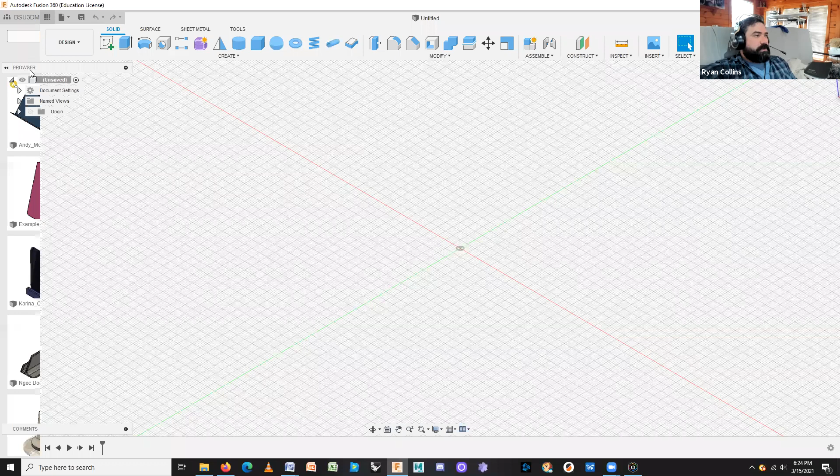Alright, so let's get started with this. I imported a model that I made before, let me open this up. I started a new folder for Lofted Vessels.

Basically, what a loft is for—whereas for the rotate vessel we used the revolve tool—let me change the appearance here so you can see it more clearly. There we are. The revolve tool works excellent for fully rounded objects, something more like a thrown cup or something like that, so it's cylindrical.

Loft is excellent for making still somewhat rounded, kind of organic forms, but over more unique profiles. That term is going to be very important in this assignment and just in using lofts. A profile is a cross section at any point in an object.

Whereas before I showed you how to use, and I'll demonstrate here again, under Inspect, the section analysis tool, which we did right at the center plane, showing you splitting the object in half, basically how a revolve tool would work.

Well, this works instead—let me select my face here. Instead, oops, wrong one, I wanted the plane. This is going to be taking cross sections vertically, and the loft tool will actually generate a full form around a couple of, or however many you denote, major sketch profiles.

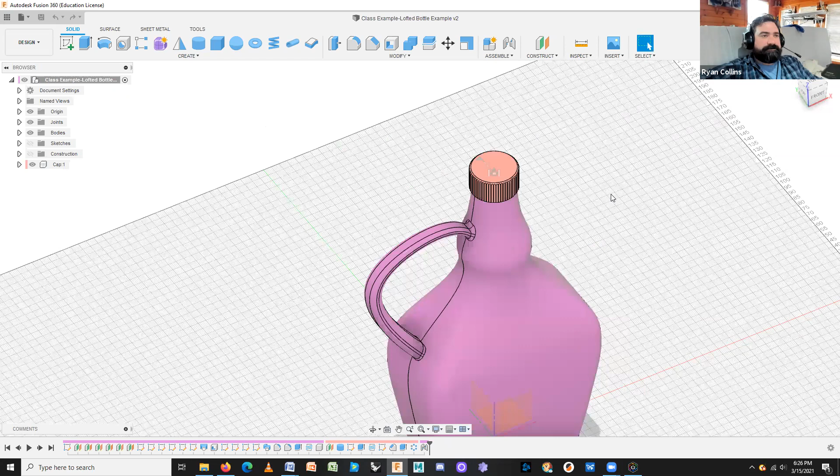I'll be showing you different ways of making handles, connecting them, as well as, as you see on the bottle cap here, I'll hide the cap, there are threads on this bottle. This is also hollow. This is not a solid form. So far, we've been making hollow or solid forms by extruding sketches and such down through the body.

With this, we'll be actually using the shell tool as well, which creates a hollow space inside of a different body. It doesn't have to be rectangular or angular like we've been doing with extrude. It can create that through really any method. Really neat tools.

And then finally, unhide the cap. I'll also be showing you, if I grab this cap, I can drag it, and you see it is both moving upwards and it is rotating. Now, we'll define how to use these joint tools later, and it's not actually interlocking right now. I clearly have to redo that. And as I changed that, my position icon came back up. I don't want to capture that position. I want to revert back to what it was before.

So that's the stuff we're going to be covering. That's going to be a lot, but once we start discussing it, honestly, it surprisingly simplifies. Because like any of these we've been working with so far, you get a complex form. It's just a series of simple functions, all pushed together. So let's get started.

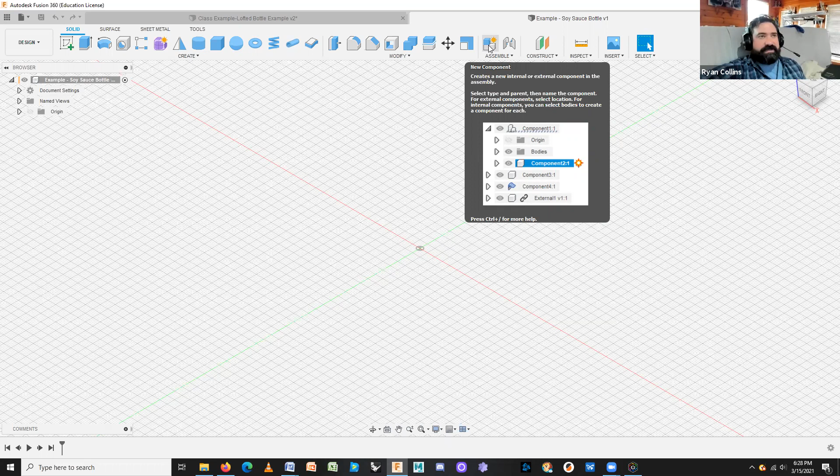So I'm going to start immediately by creating a couple of new components. You could always do this later. I like to start it now, just so I have them defined, so I try not to confuse myself later on. It's still going to happen, but whatever.

So I'll do one as bottle. I forgot to uncheck the activate component button. So remember to go back up and activate the entire tree. New component. And this is what I was talking about. Uncheck that activate checkbox. And with that, I'll just title that as cap. So great. Now I have those already established. So I'm going to activate the bottle component.

Now what we're going to do, I'm going to start with one single sketch. And looking at my soy sauce bottle, I'm going to get a general sense.

Now, again, the soy sauce bottle is not an ideal bottle, but I don't know what I did with my syrup bottle that I usually use as an example. We probably just finished it and I forgot. Which means, oh no, I don't have any syrup in the house.

All right, so I'm going to start with just getting a couple of general dimensions. I realize you can't see my ruler here. I'm not measuring the upper bottle, the entire cylinder. I want this lower part because this curves downward. So that looks like about 45 millimeters. So I'm going to start a sketch. I'm working on the flat bottom plane here using a center diameter circle, right in the center. Go out, 45 millimeters. Great.

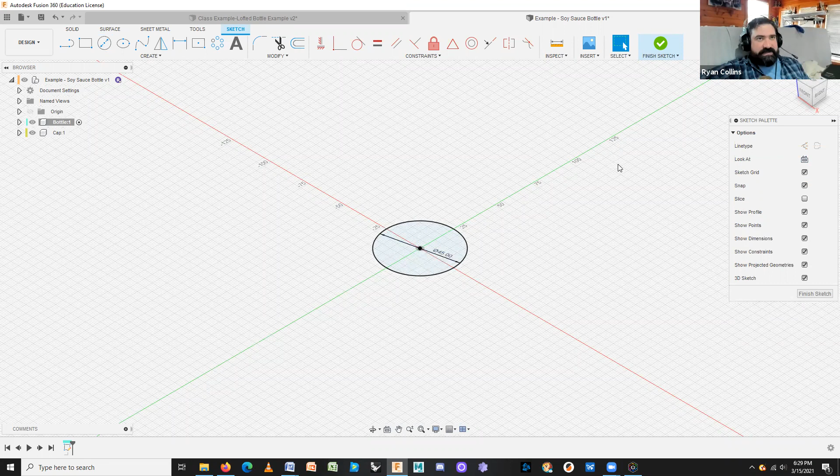Now this is where this process starts to get a little bit tedious. You would want to say, all right, I'll keep doing the sketches and go up from there. That's not how this tool works. I'm going to finish this sketch. Now what I'm going to do is create other sketches further up and away from my starting point, which is the base.

And to do that, technically you could drag sketches upwards, but that gets really problematic, because if you make any changes, then you run into the... word fell out of my head. I'm sorry. You run into world coordinate problems.

Just like before, when some of you had experienced, you dragged an object to somewhere, selected capture new position, and it snapped back to where it was before. Those are the problems. However, if you build a construction plane for each one, it gets around that problem, and then you can also make alterations as you like.

So to build a construction plane, look up at your main toolbar. I've already finished that first sketch. It's the default first button on construct. Click that, and first it's going to ask you where you want to start, from what plane is your reference. I'm going to start there.

Now I can either enter it numerically, a distance, or drag it upward. What I'm going to do is measure up from that first cylinder, or that first circle, up to the next major point. So I'm going to measure up to there, and that looks to be about 15, let's say 14 millimeters.

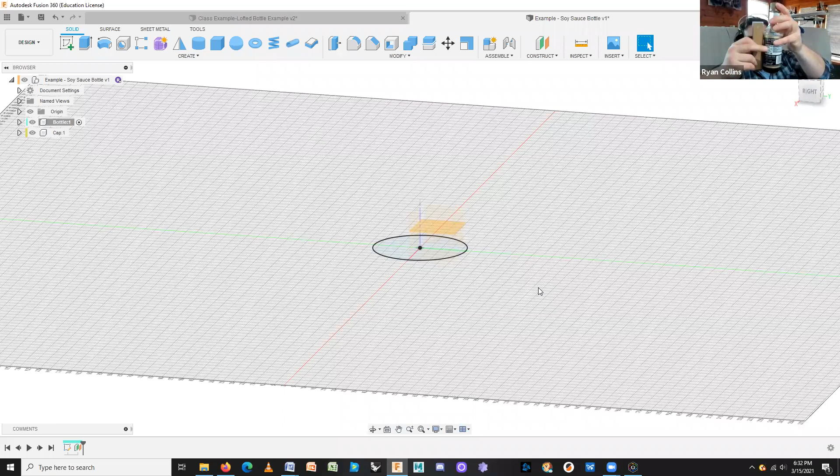You can always measure either from the original flat plane or from your next one, so you keep stacking measurements. Doesn't really matter, it's however you prefer. I'm going to measure up to where this shoulder of the bottle starts, and measuring from the very bottom, that is 115 millimeters.

So I'm going to make another construction plane starting from the original origin, and I could drag it up or just enter numerically, 115. Now I'm going to start to there. Next point is where the bottle comes down to the neck. Measuring to there, that's at about 140.

Again, construction plane - remember, if you right click out to the side, you have your recent tool selection - and I just measure to there from the origin point, 140. Hey, isn't that convenient? Went to right there. Did I say 140 or 145? 140 works.

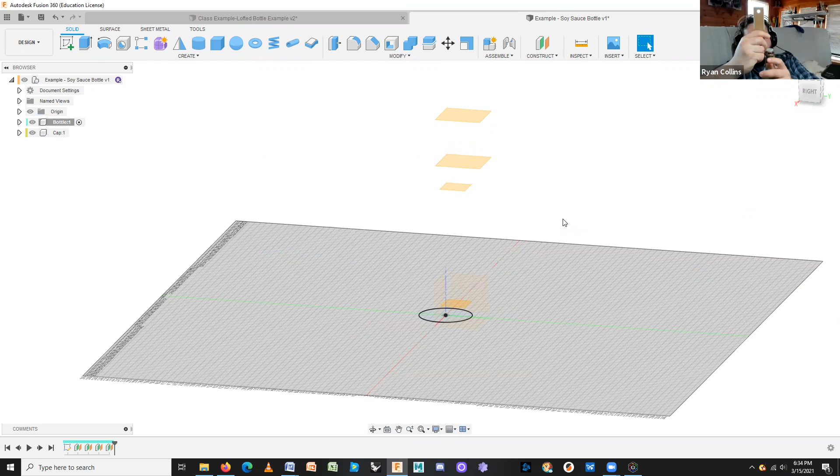These aren't actually anything, these are just reference planes in space, doesn't actually measure or matter. Now the final part is where those threads start, going up to the final tip - that's about another 20. So instead of starting off the original, I could start it from there, go another 20, same diff.

Okay, now I have my major construction planes already in place. From here, I can start to create my major sketch elements, my major profiles. Again, you do not have to make all your construction planes first - you could go point by point or layer by layer. It's up to you, I like to work this way. That way those are already set, and I can make changes as I go. It's totally up to you.

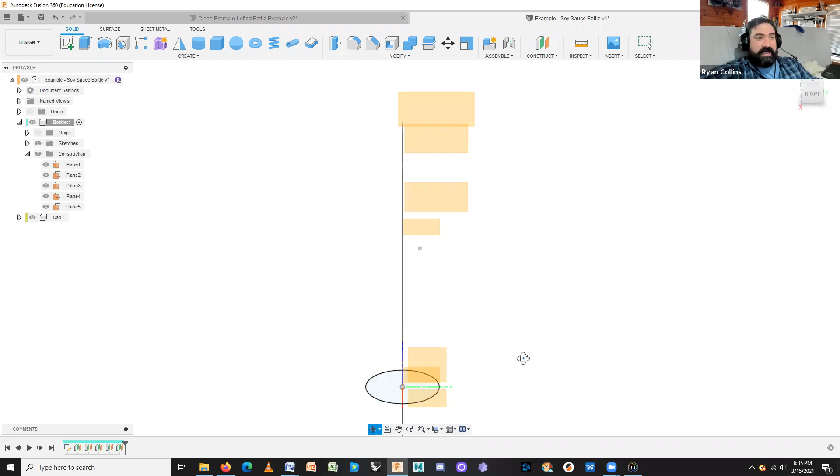I'm still working on this component. New sketch - and if it's hard to see, you can hide the origin. If I expand this component now, you'll see I have these construction plane options, so that way if I need to, I can hide or rename them so I don't get as confused. So I'm going to select that next one up from the bottom.

And that profile of the bottle looks to be about 55 millimeters. Great. So if you look here, if you can see more clearly, I am working above that original sketch. And remember, the plane just gets generated, this grid just gets generated automatically. So I'm still working directly from the center.

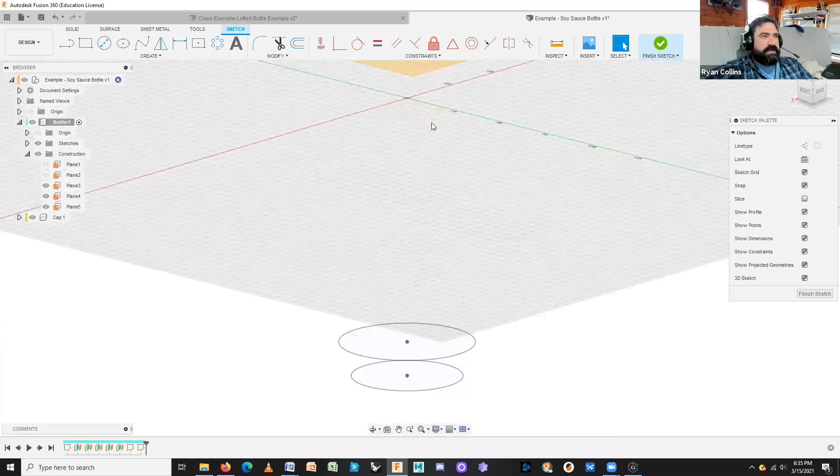That one's 55. Great. And if I look over, you can see that that sketch is slightly larger than the next. Great. Finish sketch. Start a new sketch. Now I'm going to work off of the next plane up. Do the same. Center. This one actually is also 55. So it's basically a cylinder from here to here. Finish sketch.

Start new sketch. Working on the next plane up. Now the bottle shrinks down to about, looks like about 33 millimeters. So I'll start there, working right in the center, 33 millimeters. Finish sketch. Like I said, this part gets kind of tedious. This is a cylinder from there. So same, 33. Another sketch, next plane up, center circle, right in the center, 33. There we are. Finish sketch.

Final one. And I may have mixed myself up here. I may have to add one more.

Final one. That soy sauce smells good.

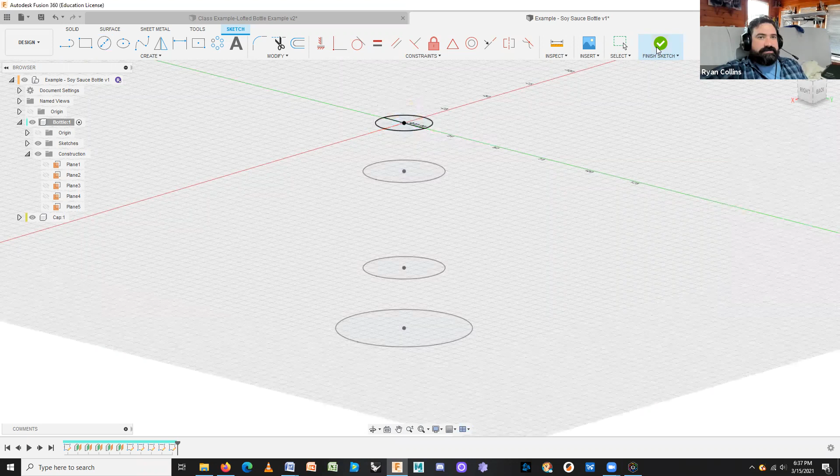That looks to be about 23 millimeters. So we'll start a sketch on that plane. Center circle. 23 millimeters. Not 3, 23. There we are. Finish sketch. Okay. So now you can kind of make out where a bottle profile might begin.

So here's where the Loft tool comes in. Under Create, or if you've added it to your toolbar, that's fine. Go down, Loft. And as you see in the example here, it creates a transition shape between two or more sketch profiles or planar faces. There's different ways of doing it. But you see the example here, it's going from a rectangle or square to a circle, and it automatically generates between those surfaces. So I'm going to select Loft.

Now, a major thing that's important about lofts, and I'm just going to hide the construction planes. There we are. The order you select your items is very important. You have to start from one end and go to the other. Now, does it matter if you start at the top and work down, or the bottom and work up? Yes and no. If you're just making the loft, it does not matter.

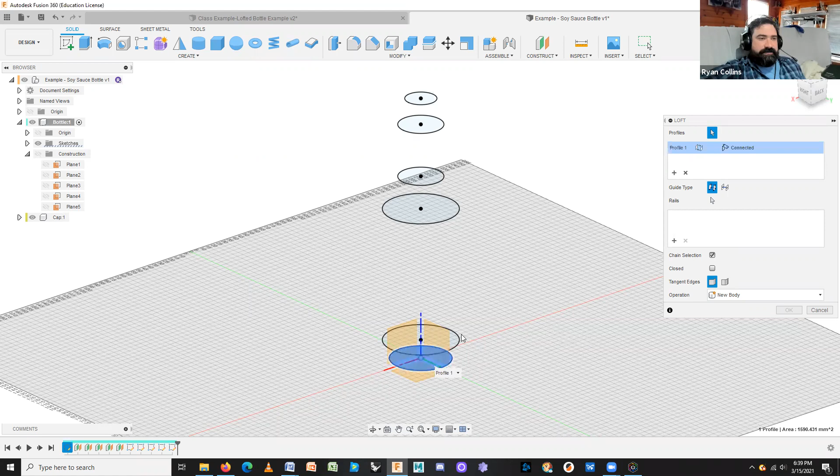However, with the loft, we're eventually going to use the shell tool. The shell tool works best if you're using it on the last surface or sketch profile that you are working with. So I recommend you select your profiles from the bottom and go upward. So I'm going to select the first sketch, second sketch, third, fourth, and you see how it's automatically generating. Fifth and sixth. All right.

So obviously that's problematic. That is not at all what the profile actually looks like. The bottle is much more cylindrical, but it is trying to generate as it sees. Now you have some options here. Guide rails. Right now we're not using rails, so we'll just use the center line, and I'm going to discuss what guide rails are next after I show you how to play with making handles. There's no active center line, so that's fine. I'm just going to use rail then. It's not really a problem.

Yes, these are all connected. That's fine. I have chain selection. It just chains everything. You can click and unclick, see how it looks. Closed makes this a sealed object, or rather unchecking it makes it not. So I want to leave that as closed. The end caps are just the end caps. I don't need to add anything to that.

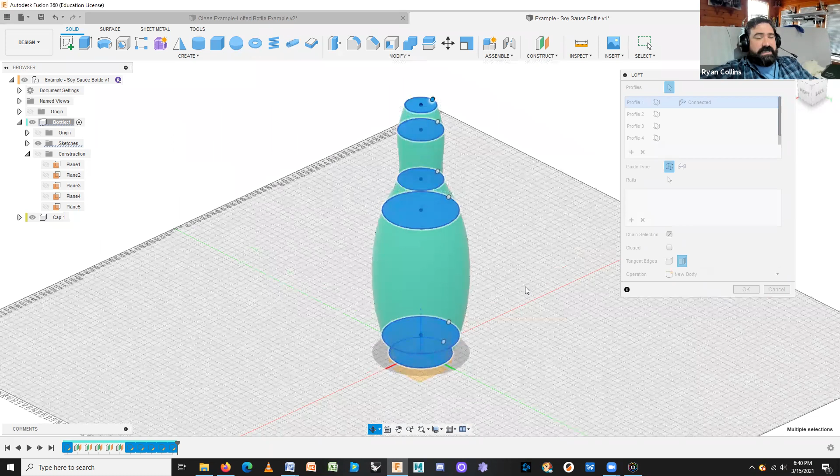You can play with the merge or tangent edges. This, depending on your model, can make big alterations. Because all of my profiles are circles, it doesn't really matter. If I was going between rectangles or squares and circles, it would definitely change. So I'm just going to leave that at merge. All right. So like I said, this doesn't really work correctly.

So I'm going to actually save this as a new component so that I can throw that out later, or I can keep that component separately and play with this again. So, all right, great. That just started a new component. It added it within the component tree. Cool. So you can see how it automatically generates these forms. So I'm going to hide this first one.

Goes and hides all the sketches automatically.

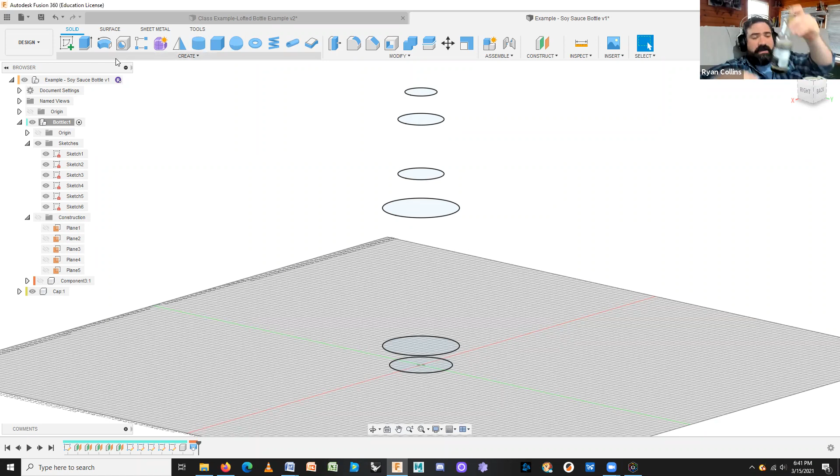So now I'm going to show you a different way of working with that same set of tools. Now this I'll probably have to add additional construction planes, and that's where the labeling can definitely come in handy. But since my bottle is actually much more cylindrical, let's play around with that. I'm going to go to Loft, and I'm just going to work on the top here. So with this one, I'm going to go from the top down.

Oops, I accidentally selected that point, not that. So let's close that one. I didn't want that, just the center. I wanted the actual form there. All right. Basically the same thing. So let's select out of some of these here. Going from direct cylinders to lofts gets kind of problematic.

So what you can do is, and I'll show you the difference here, I'll just create this section here, one new body. Great. Now I'll do another loft, only this time I'm going to use just those two profiles, and it's going to create a direct cylinder. No, I don't want to cut. I'm just going to leave that as a new body as well. So this is how you can get around if you're trying to make direct cylinders or you're trying to clean up a form. This is an easy way of working with that.

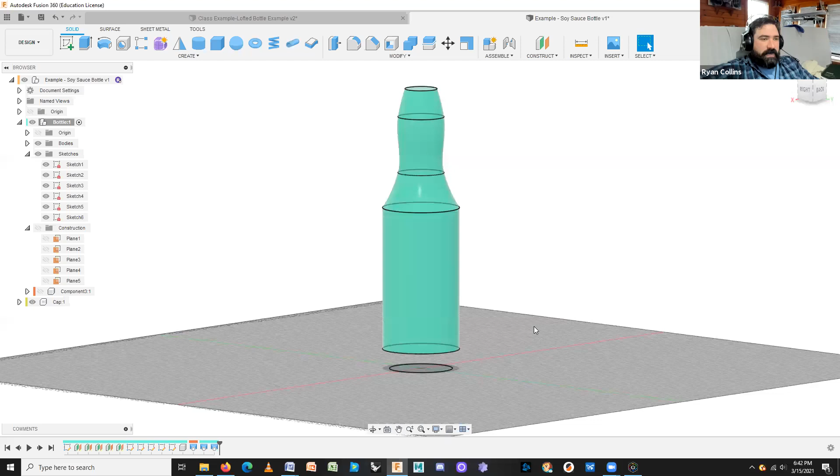Now, the problem is if I did the same down here, well, that's just going to make a cone. So this is where you really need to be able to have additional shapes to play with. So I'm going to make another construction plane, and I'm going to drag this just below that one. So we'll say 12 because it's at 14 millimeters. Okay, great. So there's a construction plane there, and it automatically hid it.

But what you're creating is not visible. Oh, yeah, that's fine. I'll go ahead and unhide all of these. That's problematic. Okay. So now I'm going to create a sketch. And this is where this stuff gets really confusing if you're not careful with hiding planes. Oh my God. Why is that not visible? It should be. Oh, there we are.

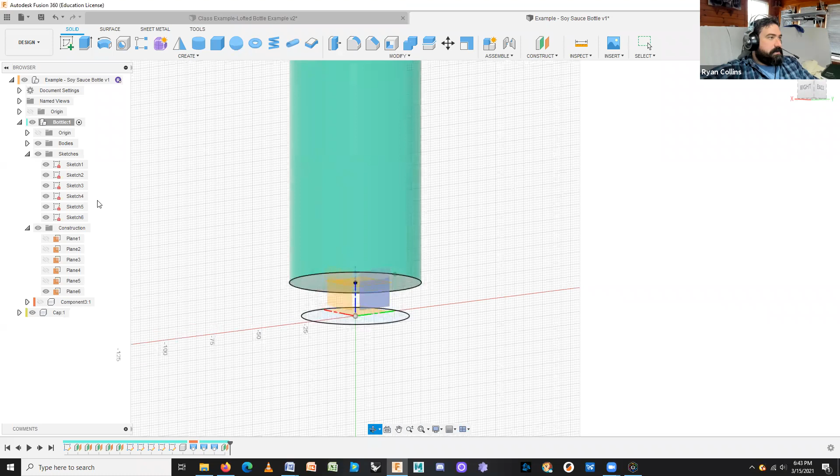So what I actually want is that one construction plane that's floating just below. There we are. God, that's hard to grab sometimes. And again, if you have trouble getting to where you want it to be, or getting your icon where you want it to be, hide bodies and such, that's fine.

There we are. And what I want is I want this circle to be just slightly larger than that first one. So we'll go with, sure, 56. That's about right. And finish sketch. Because I want it to bump out ever so slightly. Great. I'll unhide the bodies, and I'm going to start one more loft.

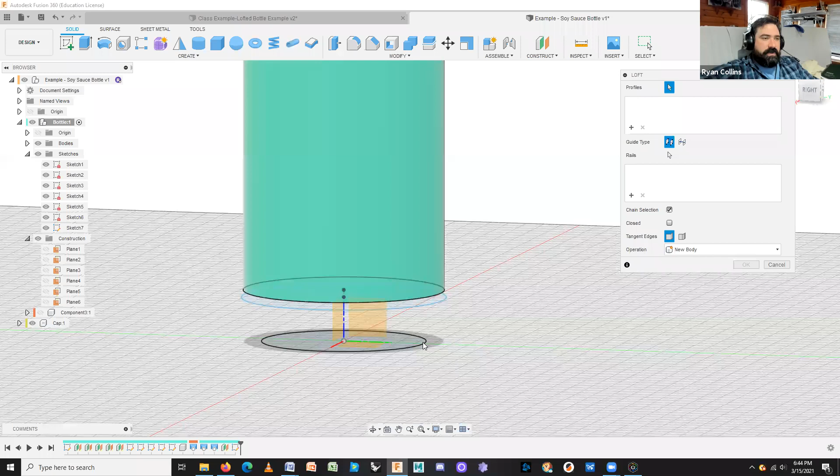So now that I have this additional little bump out, when I start selecting my profiles, I now have that additional one. See, the first, if it were just between two, it's just a straight cone. But now I add that third one, and it rounds out that bottom because it's drawing a curved line.

Effectively, how the Loft tool works, think of it as a fit point spline, like in the sketching. Instead of a straight line, a fit point spline, only it's drawing it all around, or it's drawing an infinite amount of them. It's not infinite, but rather than a line, it creates a surface in the same way. So that's how it works. And now I'm going to leave this as separate bodies for now, but this is how you can create those little bump outs.

So ideally, I would add another circle, another plane just up here, and that would help me create that bump out there. But right now, these bodies are all three separate ones. Now what I could do, I'll hide the sketches. Now I could go and select all three of those, use my combine tool, and join them all together. So that'd be great. But I'm going to leave it separate for now, just so I can work with it.

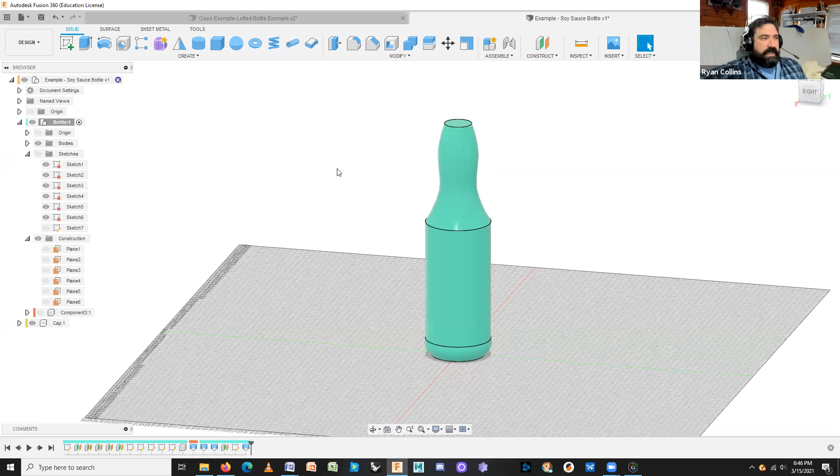Now, another problem is that top there. You get to threads, that sort. Right now, first, I want to work with other ways you can work with a loft to, say, create the handle and such. Or for that matter, how I can create the cap. I can go and select my cap component now. And I know that my cap needs to be larger than that cylinder there because it's larger than the threaded surface will be.

So I guess it will actually make sense to do this separately. All right, so right now, as it's showing, it kind of got messed up.

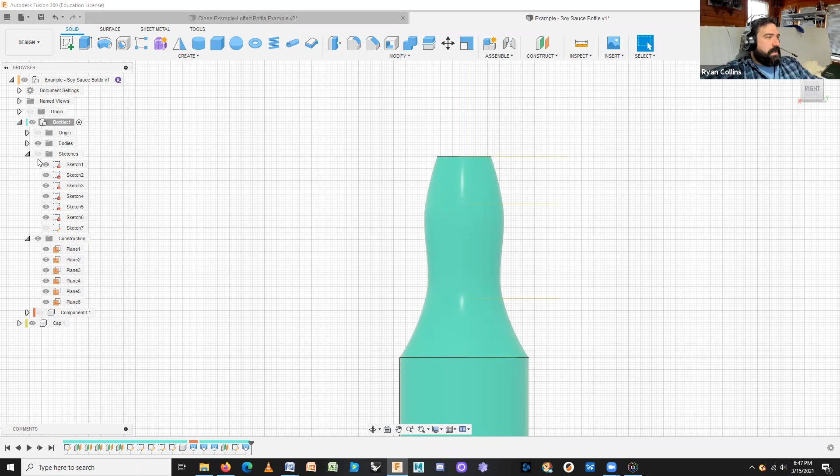Inside of here somewhere. All right, so let me unhide my construction planes, and I'll just hide the body for now. Leave the sketches.

So what I needed actually was one more sketch there to delineate what's going to be the cylinder, direct cylinder for the threaded area. So if anything, or not if anything, it's what I should be doing, I'll make another construction plane. And I can start off with this one and just go up. Looks to be about, we'll just say 3 millimeters. Great.

Okay, and I forget what that circle is. That is 23 millimeters. Perfect. Oh, this gets so confusing in here. Sketch on that new construction plane I just added. Center point circle, and that's supposed to be 23. Great.

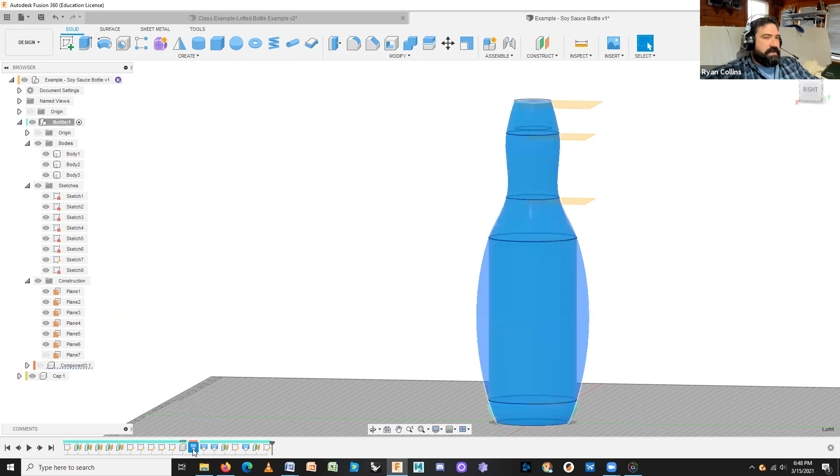Now, when I unhide the body here, it might give me some trouble. No, because it just omits that. So this is why I left these as separate bodies. Because now I'm going to delete this one, or rather, I can go back on that first loft. Not that one, that's a different component. That loft, and let's edit this feature here.

So like I said, it does matter what order you do things. So I'm just going to go back and delete some elements here. And instead, I'm going to start from the bottom.

Did it hide one of my sketches? Oh, cancel that. All right, so this is problematic. I am actually going to have to, instead of editing this loft, because the loft here occurred in the history slider before I added that additional rung. So I'll have to delete that feature. That's fine.

Couldn't you move the plane and the sketch to before that loft in the timeline? Possibly, but just to help with everybody what they're all doing too.

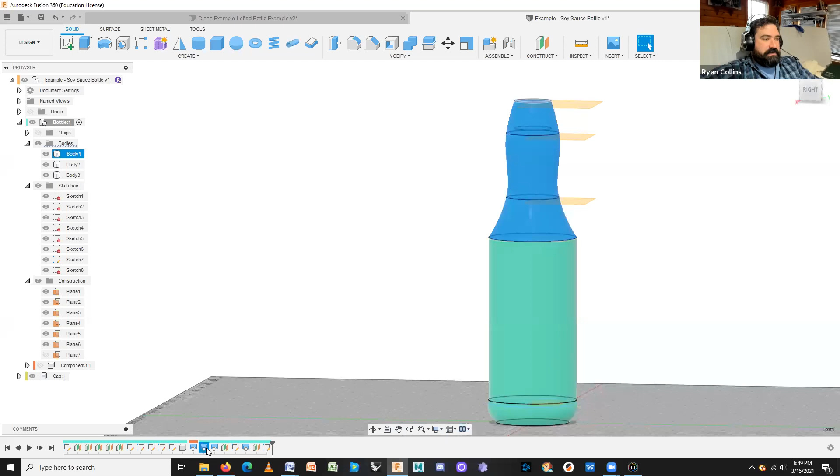Let's see here, I just want to delete the feature. Go away, there we are. Okay, so let's just add a new loft here. Now we're going to work upwards and see if it lets me do it this way, or if it just goes completely nanners on me. Yeah, it's going to go kind of screwy on me.

Okay, that's fine, so I'll have to construct this top here in multiple levels. All right, so this is where, no, I don't want that to, I want that to be a new body. There we are, chain selection. Yeah, it's really throwing it out there. Well, that's irritating.

Yeah. Unfortunately, it's not letting me loosen up my constraints here. All right, well, let's try from the top down. Maybe that'll help.

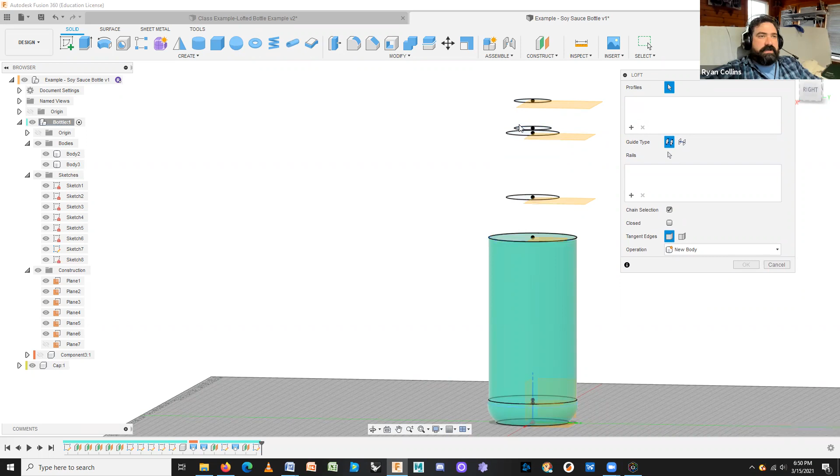There, oops. Didn't delete all the profiles I need to delete. There to there. And it's still not really. Well, we'll mess with it more later.

Okay, because what I wanted was just a straight cylinder here. So the other thing you could do, if you just need a straight cylinder, now is where I could also use an extrude tool and use that top profile and just go up to the next. There we are.

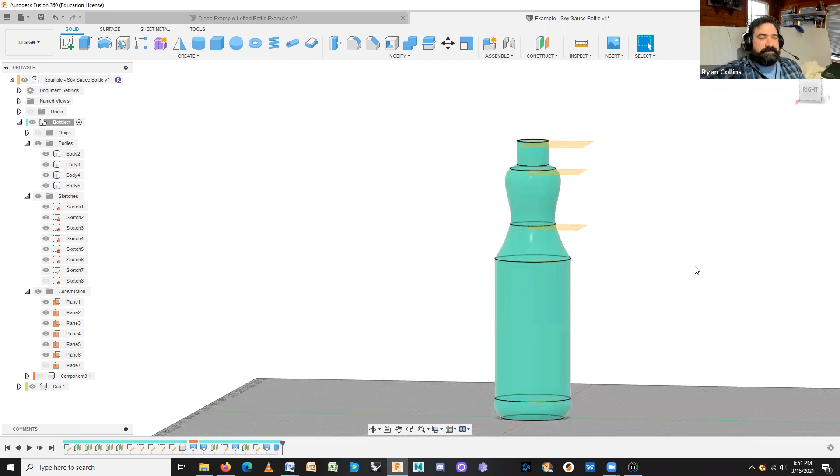And just keep that as new body. Great. So obviously that right there, I'm going to have to tweak the profiles a bit, but just for time's sake, as we're moving along here, let me go ahead and join all these together. So I'll do a from the right selection box, click all the things, combine, and join.

Now I'm going to, again, do a new component just that way I can keep everything separate and I can always go back and alter things. So click OK, it's going to do another new component. Oops, I didn't manage to select all the things. That's problematic, but go back, edit feature.

Just need to make sure I'm getting all of those. Why isn't it letting me? Well, that's strange. Oh, I must just not have actually selected everything at that time. At that time. Interesting.

It keeps omitting stuff. All right, well, I'll have to figure out why it's doing that. I'm not sure why it's doing that right now, but anyway. Well, I can't do the shell unless it combines everything.

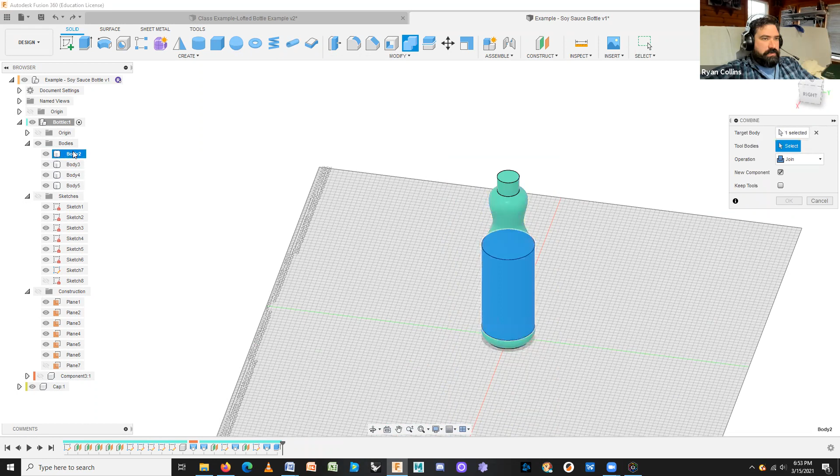That's very strange. For whatever reason, it is not allowing me to select all four. I must have skipped, I must have done something. There's no reason it shouldn't be doing that. Let's try this, maybe it only lets me, maybe it has a 3-item cap. That's definitely not it. There's something up with this bottom one. Does it have something to do with one of them being selected as the target body and the others being selected as tool bodies? It shouldn't matter because during a combine, it's just joining everything.

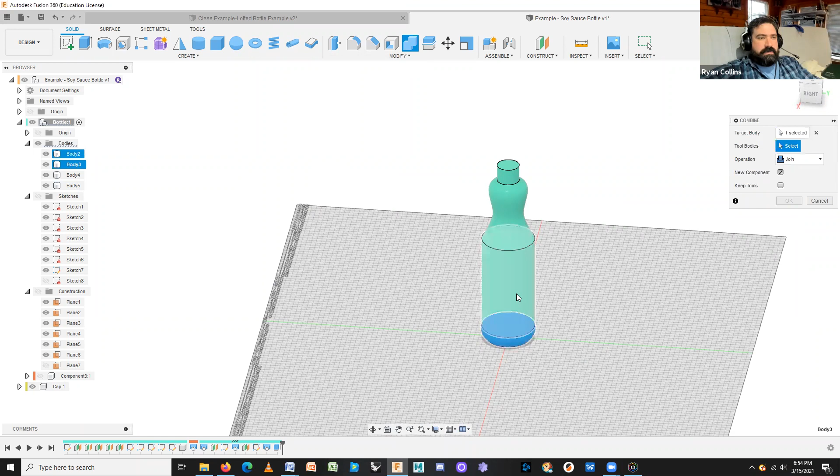It's not that one is necessarily acting on the others, unless that is the case. I guess so, that shouldn't matter. But all right, I guess that's one of the quirks of Fusion then. All right, fair enough, good call. Thank you.

That's always fun. All right, so I do still want to throw it out as a new component just that way I can go back and play with this later. Again, weird, it is omitting that. I have no idea, that's so strange. Is it including it? Is it keeping that one in the original component while having it also be part of the new component? I don't know.

Let me hide those, and I'll go down and activate that. Now it's still showing, but for some reason that one body remains. That is very strange. That was what happened when I had to do on the phone stand when I connected 3 legs. I selected those 3, and then the target was the back, and it all becomes one.

But since you're combining, it's like, oh, this one is combining to these ones, I guess. Right, and it makes a lot more sense when you're joining dissimilar items, but when you're basically stacking things... yeah. Well, once again, it's all Fusion functions on order of operations, very structurally.

So, all right, there we go. We all learned something important. All right, much appreciated, thank you all both. Thank you both for the input.

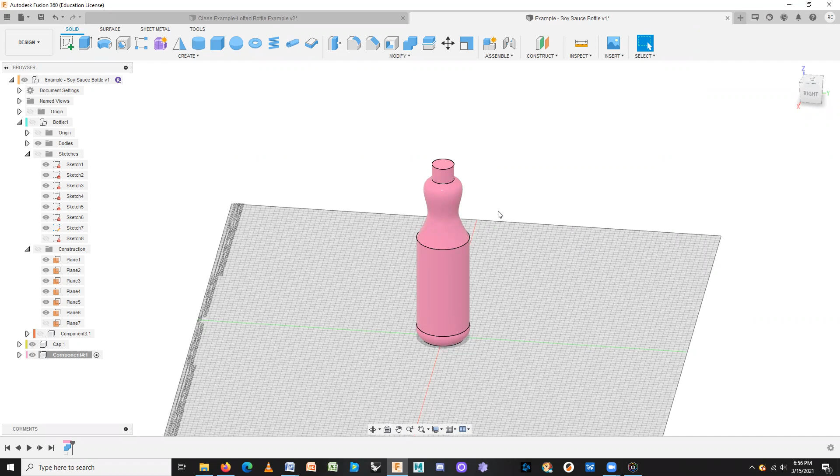Is that making the round shape? No, the round shape is occurring because, let me go back and hide these. The round shape is occurring because I don't have the correct profile sketches here, or I'm not doing it in the right order. This between the top, between the neck, it needs to be a cylinder. I need to add in more elements like I did for the base, and it'll come out the correct way.

But just for time's sake, I wanted to try to speed run through this to get everybody informed on this stuff. Okay, but yeah, that's not a difficult fix. I just want to try to cover as much as we can tonight.

So the next one I wanted to show you is the shell tool, and this will make this now solid body into a hollow body. So select shell, and what it does is it basically creates, it's basically the offset tool, but for a full body rather than just for a sketch line.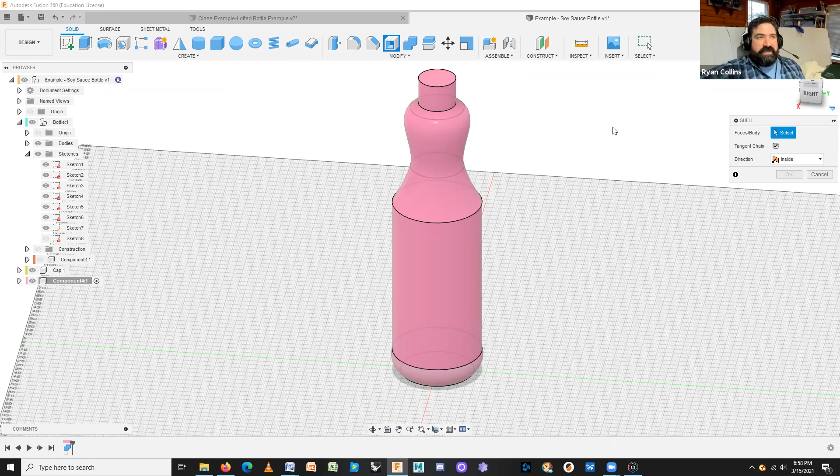And again, this is very important which face you select, because you want to select the face that is going to remain open. It's going to assume it's going through the entire new body here, but I want to select this top body here. Now, I will warn you, more complex shapes will definitely bog down your computer as it tries to compute the offset, so I highly recommend don't use the slider, just do a numeric input. So I'm going to select 3 millimeters, which is usually a good thickness when you're 3D printing.

And there we are. So that actually went pretty quickly. I'll try 2, a little bit thinner. Actually, it might need 3 just for the thickness.

So you have your other options here. Obviously, you can create a shell on the inside or outside. But just inside is what we want. Now let me change my visual settings to show hidden edges. You can see I can look down inside that bottle now.

That is now a hollow form. Very cool. So now what I want to do, I was going to create the cap first, but I want to just go ahead and continue with this bottle. Now we're going to create the threads. And this is another tool that really works pretty easily in Fusion. Go to create, down to the next set is thread.

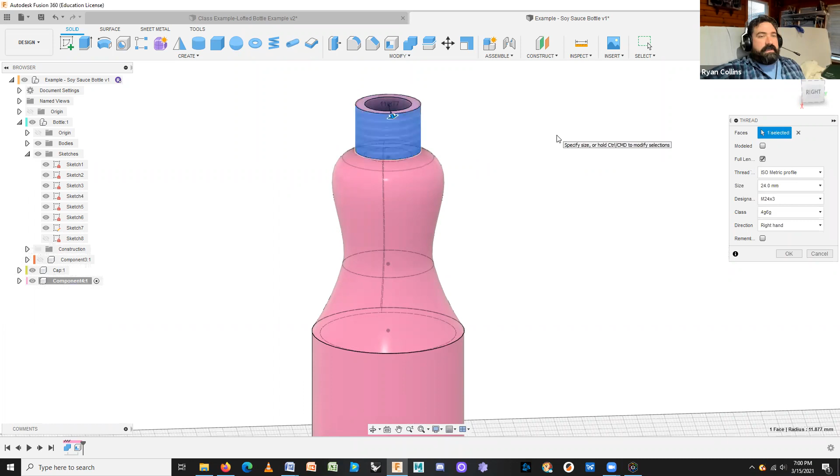Select there. Now this slider here relates to the size of the actual threads. You could do this numerically here, but honestly, I would just leave that however it generates.

Now, one thing you're seeing is it kind of looks like there's threads, but they're not really there. So to save generating space, so that way the computer doesn't have to keep computing all these, or especially if you have a much more complex model, it will generate the threads, and if you exported this, it will generate the threads properly, but it's not going to show them all the time. There's a checkbox that is default unchecked, select that, and now it will actually model those threads.

So now you see why I went ahead and made that bottle that much thicker, because these automatically generated threads are really quite deep. Yes, you can change these around. There's most certainly different sizes, play with something a little bit more, a little bit finer, or not. I would just honestly leave it as the default threading. That makes the most sense.

Because a bottle thread is not a standard thread. It's probably more like a pipe thread or something like that. So if you want to play around with that, great, but for the purpose of this project, I would just leave it as the default. And there you go, that's how you generate threads in Fusion. So I have a now hollow body that has threads. Cool.

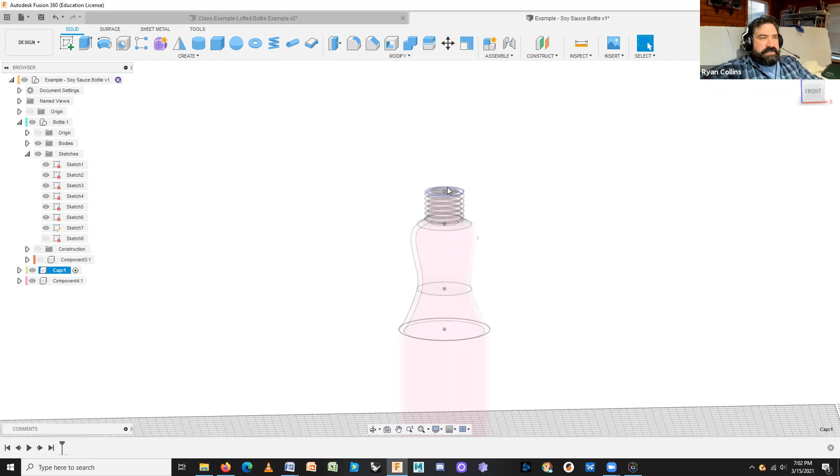Now I can go and create my cap. Basically with this, I could just create a cylinder, or better yet, I'll show you a couple different ways. So I can start at the top here because I have a construction plane up there already made. However, that construction plane is within this other bottle component, so it wouldn't be the worst idea to make a new construction plane. So I'll go ahead and do that.

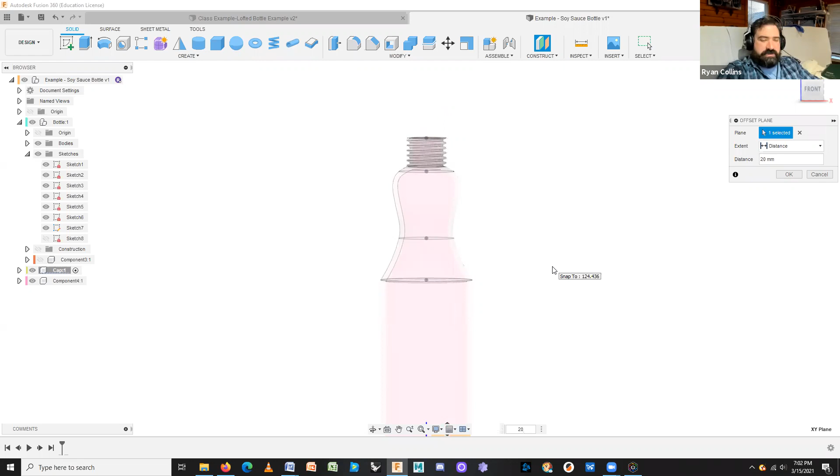Construction plane based off of the origin plane, and I'm going to drag this up. I know the bottle is 120, so I'm going to make this at, let's say 205. A little bit less, 202. Sure, whatever. All right, so there we are. Now I have a different plane that I'm working from.

So again, create sketch on there. Circle right smack in the middle. Now, when you're trying to select things, often it's going to try to catch the body underneath, so you're probably better off just hiding that component. Oh, because that's component 4. My mistake. There we are.

So that bottle cap, the top was 23. This needs to be larger. So I'm going to say, and the cap itself, if I measure it on my actual bottle, it's actually like 28. So there we are, 28. Great. Finish sketch. I'll unhide that bottle just so I can see what I'm doing here.

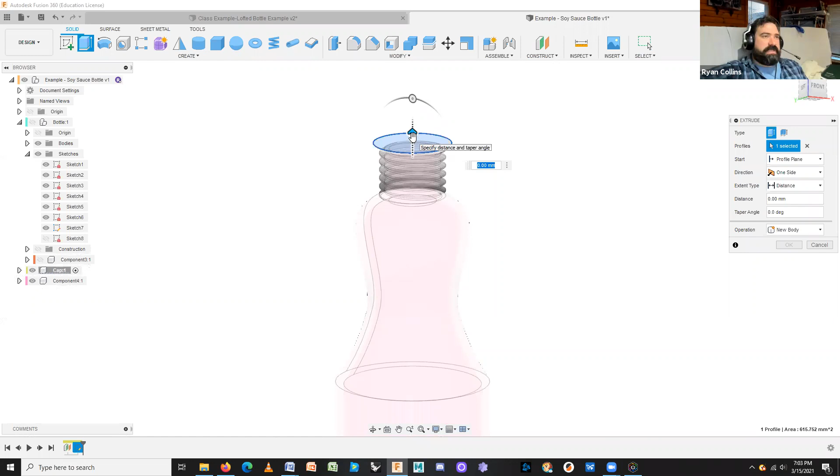Now I can extrude, and extrude that down to about 18, or in this case, negative 18. There we are. And sure, new body, all that fun. Great. And now I will go ahead and hide that bottle component again.

Now there's 2 ways you could do this. You could create another sketch, draw it on the bottom of that cylinder, a circle on the bottom of that cylinder. I know that the hole I need is 23 to match the other one.

Okay, finish sketch, extrude that inner circle and extrude upward. Remember, if you'd like, you can use the extent to object and select the top of the cap. And instead of letting it go all the way through, you could use the offset, like 2 millimeters, negative 2. And it already knows you want to cut into that.

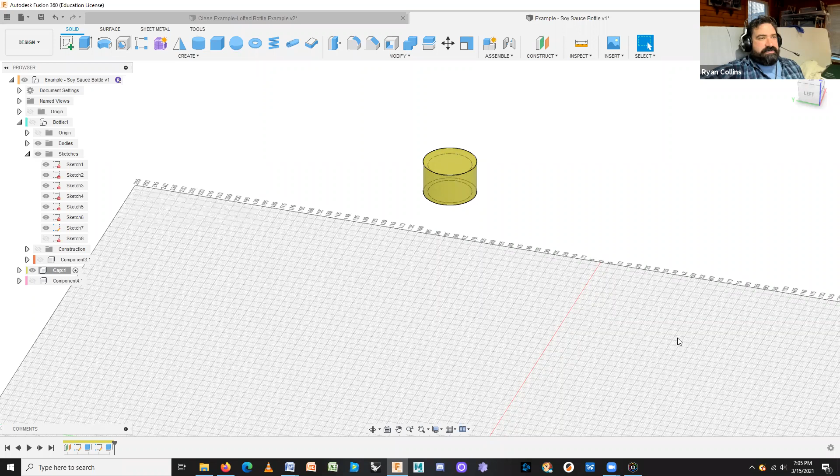Great, so there's a hollow into there. Or what I could have done is I could have also just created a straight cylinder and then use the hole tool, which will generate threads inside of that tool.

But just for the sake of consistency with what we've been doing, I'll just stick with what I did there. So create, go to threads, select the inside surface, and it's going to again pick designation 24.

Now double check that you're getting the same one as before. That should have been that same 24 and M24x3. Cool, there we are, make sure it's modeled. Okay, now those are the same threads as the bottle. Now, are they actually modeling matched? No, and that's okay.

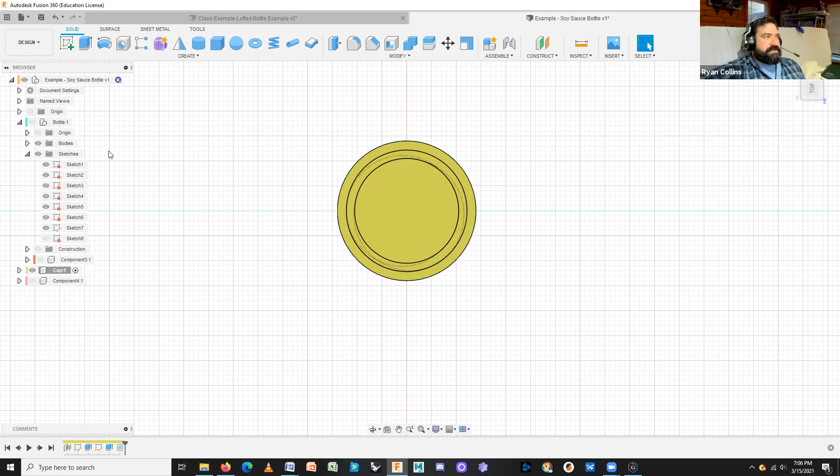So in the example, I have a bunch of different features and such on there, and I created that with the circle pattern and a chamfer. So in here, what I ended up doing is I went to the top to create those little notches. I made a sketch.

Oops, it's selecting the whole bottle that's not showing right there. On the top, you have to select the top, otherwise it won't really be sure where you're wanting to work. And I'm going to use a center circle again, and just make a circle on the edge. I don't know, we'll go 0.75, sure, why not, it's a little tiny feature.

We'll see what 1 looks like. Yeah, that's fine, great. Okay, just that one little feature.

Now, again, remember before, I'm going to use the circle pattern tool, but I'm not going to use it in the sketch because I want to create the feature first and make multiples of that. So click OK, I'm going to extrude

that circle, and if you want you can select both of them. And I could drag this all the way down, or again, I could use extent type to object, and I'll just select the bottom so it goes all the way through. Cut? Yeah, definitely. Cool, so I made that one little notch.

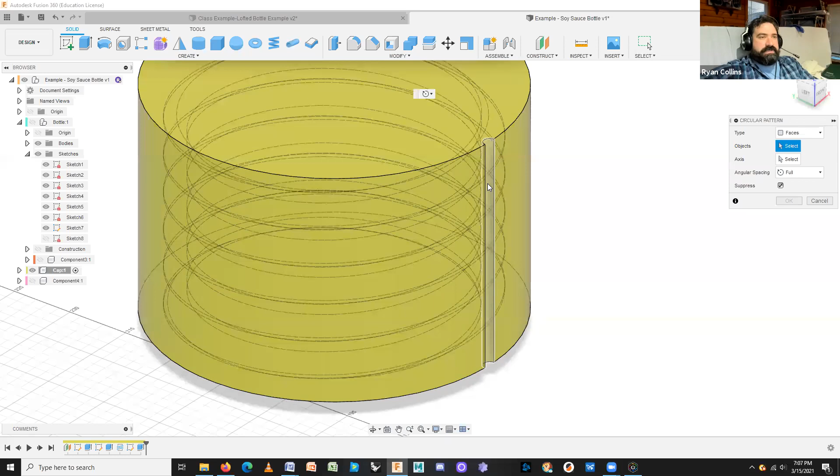Now I can use the circular pattern, select that feature, and with my axis, now the problem is it's still basing off of the origin plane that's way down there. So just select my Z-axis, go back, zoom back in, and now the default is 3. So let's see, and here you can just start doing numerically.

So when you start making a bunch of these features, again I recommend doing it numerically rather than using the slider because it will definitely bog down your computer. 30, not quite, let's try 40. Closer, 45? Ish, let's see what 50 looks like. A little more. Yeah, I like that, okay.

And it's going to take a moment to calculate. Now I've created all of those little features there. Cool, well thing is, like on the example, I had this little chamfer at the top, or you could use a fillet, whatever, just to clean up that edge. Well, if I wanted to add that, well, the problem is now I can't really grab that edge.

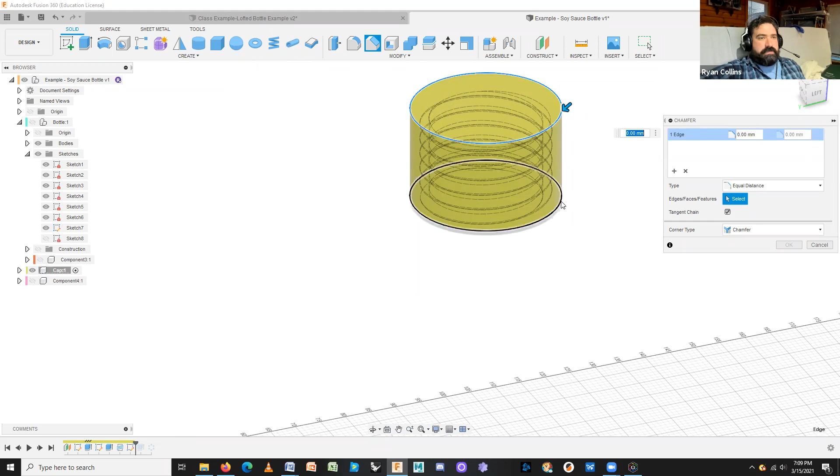But what I can do, go back in the history slider now. Since that is already created, I can now make a chamfer there and there. We'll do like 1 millimeter, that's fine, select OK. And that, again, drop that feature down between there, between the original sketch of making the bottle cap and before I made the features.

Now I bring my history slider to current, it's going to recalculate. And now it's showing me, and here, let me change my visual style so you can just go to visible so it's not quite so confusing to look at. So now it has that chamfer, all of those features, but I didn't have to try to go in and select that stuff after the fact. All about playing with the order and such.

Okay, so that's how you would make that kind of cap, and that's just a simple cap. You can play around with other features, other designs. I'm of course going to be showing you other ones, but now I'll just reactivate the whole thing so that way it's not ghosting everything out. Now I have a bottle cap and a bottle that now looks like a Pepto-Bismol bottle.

Cool, all right. Okay.

All right. So I have the bottle, have the cap. This is where, obviously, again, my example bottle does not have handles, but we can play with that. I can add something in. So what I want to do next is show you some different examples of ways you can use Loft tools and the other tools we have.

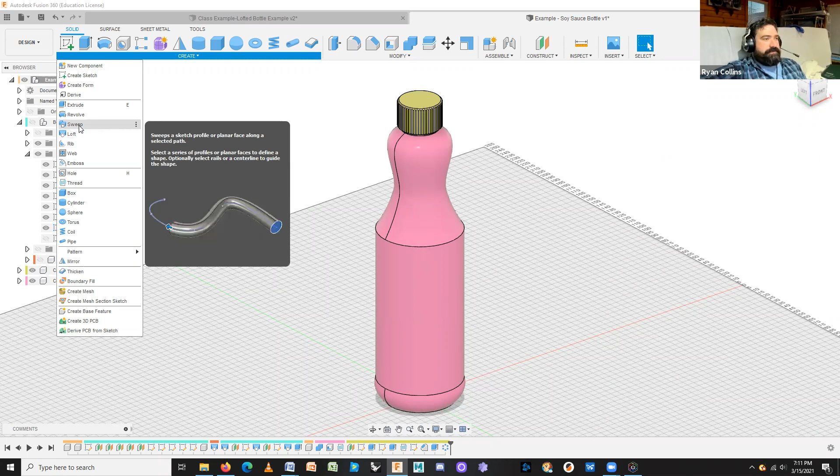I told you about the Loft, but I also mentioned that there was a pipe tool and a sweep tool. These are two different versions of lofts along a line. So let me start a new component, or better yet, let me start a new project just so I can show you more cleanly. And I'll save this as examples, pipe, and sweep. Okay.

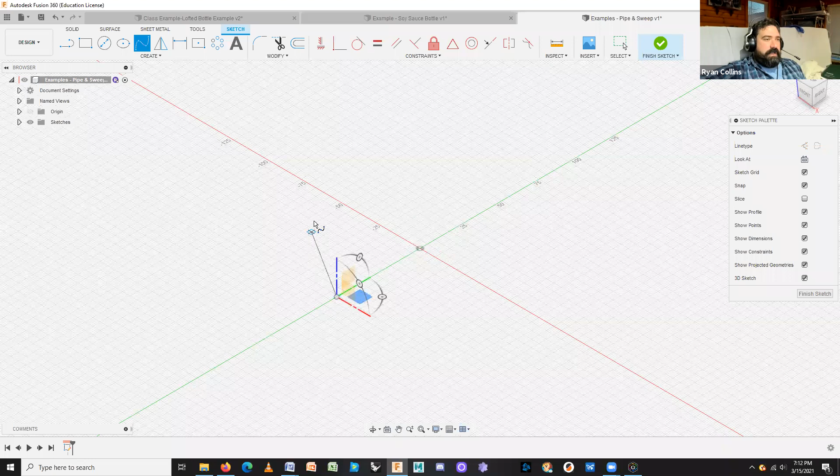So with the loft, we did incremental profiles and then generated a surface around those. I can do the same thing, but along a line. So first, let's start a sketch, as always. I'm going to start by creating what will become my path. I'm just working on the flat plane here. We'll just pretend that will become a handle. Kind of looks like a handle, sort of mug style. All right, great.

Now I can create the profile sketches in the same sketch, or I can do it separately. So what I'm going to do is create two profile sketches. I said I'd do it in the same one, but it actually causes problems because this sketch is built around the XY plane. I'm going to finish that sketch and start another one.

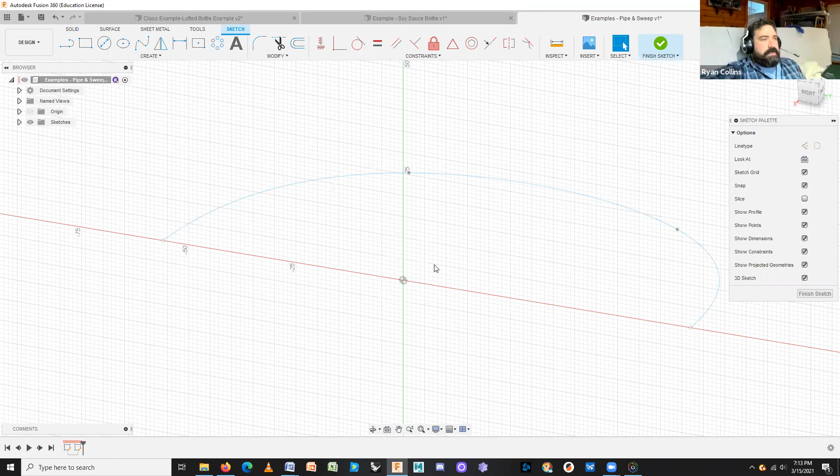This next one I'm going to start on the YZ plane so that I make my profile in the flat plane. Now I want my sketches vertical. Because looking at, let's say, a mug handle, this is going to be the overall shape, but what is the actual cross section? That's pretty much what all of these work around, the idea of cross sections.

So I'm going to start a center rectangle on this plane, but snap it to the end of that spline. And sure, 12 by 24, whatever. For the other one, I'm going to create a circle, snap to that end, and let's say 10, it doesn't really matter. Finish sketch. So now I have this profile, and the loft is going to draw a blended surface between this rectangle and this circle.

Go to create. Sweep does one along this profile. Loft can do the same, but sweep works a little bit better for this. I'm going to go sweep, profile. That is referring to these forms. Profile goes there, path, select there. It's going to create the whole thing along that one. Now you can do this with swirling, different versions, things like that. So the sweep uses one single profile that you can custom create.

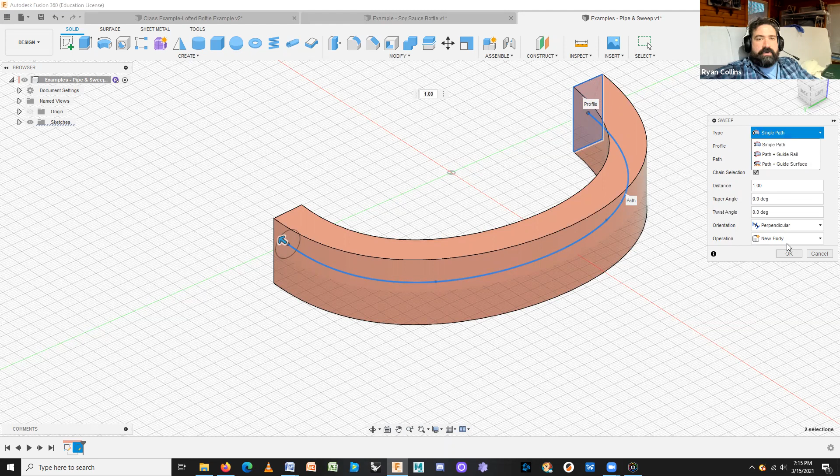And operation, we'll do new component just so you see it that way. Great. I'll label that as sweep. Okay. Hide that. It always hides my sketches afterwards.

So now I'll show you what the pipe tool does. The pipe tool is like a sweep or a loft, but you don't get to pick the profile. You only get to pick the path, and it automatically generates, like a pipe, a circle. So you can decide how thick you want it. We'll go with 12. Great.

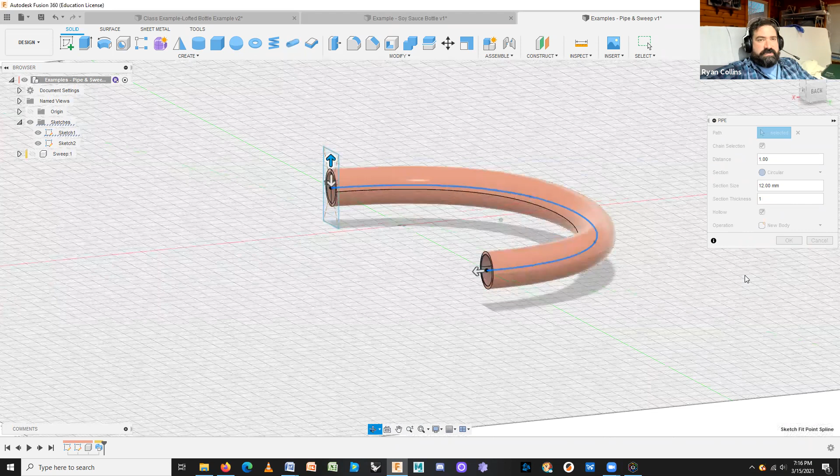Do you want it to be hollow, like a pipe? Now it's hollow. You then select the thickness. We'll go with 1 millimeter thick. So I have a tube here. You have different options. You can pick from circle, square, triangle, and you can rotate that triangle around. But we'll just go with circle. There we are. And I'll make a new component.

That's a pipe. I'll hide that.

Now the combination, the loft. I showed you the loft before, that was making the bottle. But what I can do now is select my profiles here and here. It's going to cause problems because it's not going to generate just yet. But now, yeah, see, there we go.

Error, yeah, whatever. But this is where we have the guide rails. Select my guide rail, pick the rail. What's your problem? Rail does not touch all the profiles. Yeah, it does. Or do it. It should.

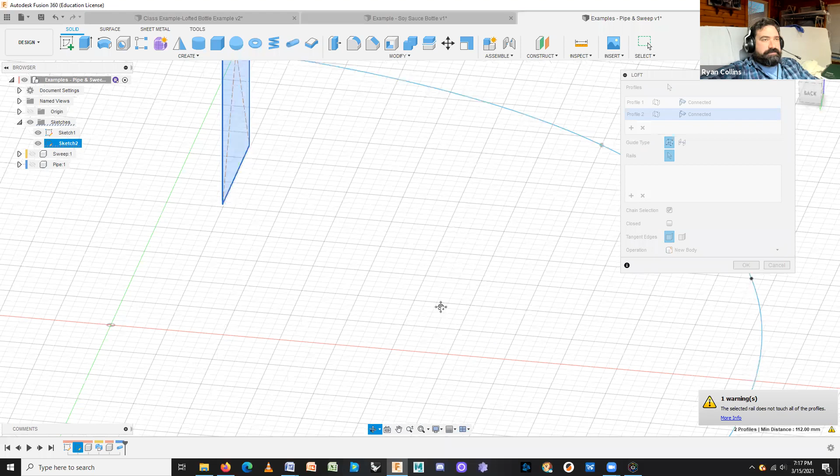That should have snapped right too. So this is where we get to find out where I messed up. Zoom into one profile, that's connecting. Well, that doesn't make a lick of sense. That is, in fact, connecting.

All right, fine, we'll use center line. Great, I don't know why it used a center line, but not the other. Okay, fine, whatever, same deal. So now you can see it blends those two together to create, in this case, a semicircle.

So that's the difference. You can create handles auto-generated as a sweep with one profile, a pipe with an automatically generated profile. And again, I'll create this as a component. Come on, it's got to catch up. There we are.

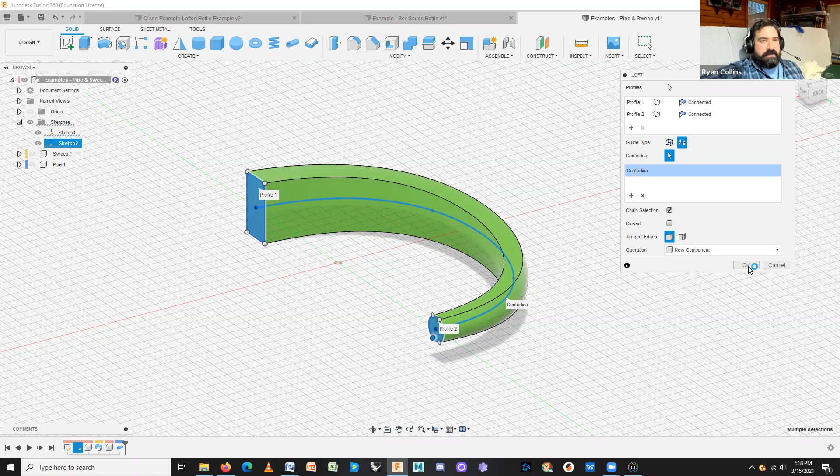Or the loft using at least two. You could still add multiple profiles within this. You could go back, tweak that profile there. I could go in. Now it does make it difficult if you try to add like chamfers and stuff to sides, because it doesn't really know what to do there.

Sometimes. Apparently this time it's cool. Oh, no, it's not, it is now very confused. Oh, okay, well, fine, it didn't used to do that. So that's how, so those are some easy ways to create handles.

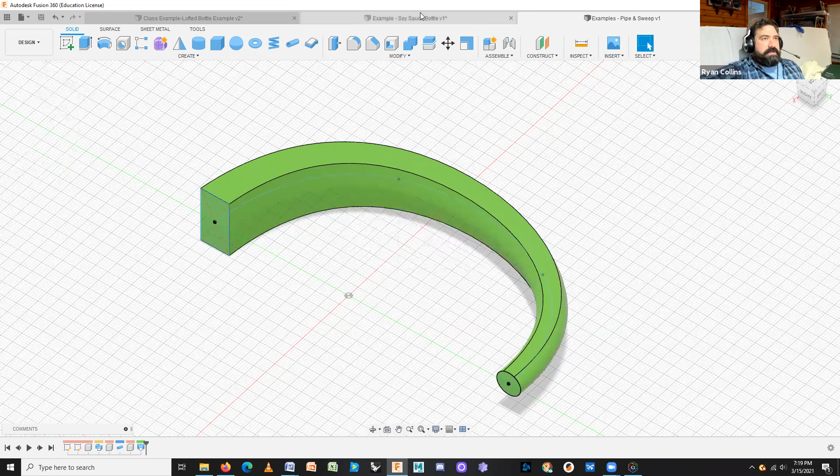I'll save that. Yep, user saved. Super duper. So how do you apply that to the bottle? Now, again, yes, I know that soy sauce bottle doesn't, but apparently my Mr. Bubbles Bubble Bath or Pepto-Bismol bottle here does have a handle.

So I'll go ahead and make sure to activate the current component, the one that I actually want to model on top of. And first, I'm going to start by creating a sketch, looking flat on that back grid, the back profile plane.

I will select a fit point spline, and I'm going to start over here. So one of the things we can deal with is it won't automatically snap to the edge. There's a way to do that, but just for time's sake, I can just get close and then we can move the finished product to it intersects.

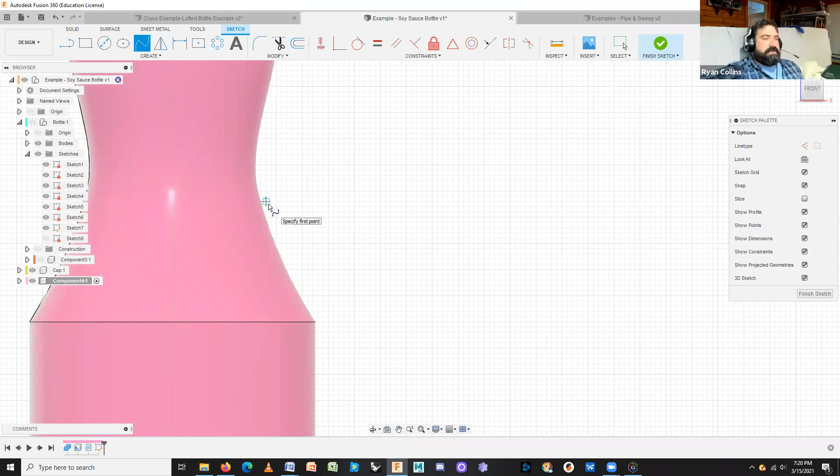So sure, this will now be a very fancy soy sauce bottle. So we'll start there, and I don't know, we'll play around to like that. Cool. Again, you can tweak these, click and drag the actual vertex.

Select again, I can pull the handlebars around. You can tweak around however you like with that. So you can always fine tune that. Like I said, these do need to be separate sketches. So click finish. Now, just so I can see what I'm doing, I hide that body.

And I want to create another sketch. Now, it automatically assumes that I'm working on that since I've turned, but let's just confirm. Yep, on the XY plane. Where's my origin point? Oh, it's not showing it. That helps. Or sorry, not XY, on the XZ plane. That's what I want. Great.

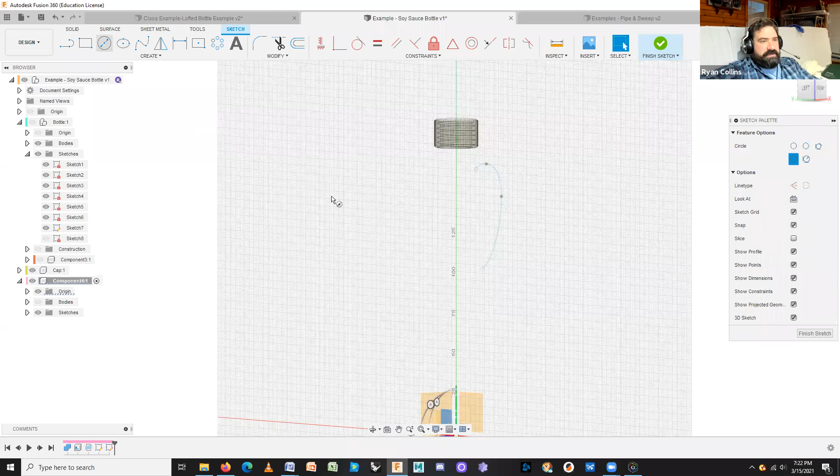All right, so I'm going to start with, I'll do a circle. And I'm going to snap to the end of that plane there, or sorry, that profile. And sure, 4 millimeters works.

Now, you don't have to do like a rectangle or circle or anything. You could do like an amorphous blob if you feel like it. I can't guarantee that it'll work correctly, but you can always go back and tweak it. But I'm going to start with a center point rectangle. Snap to the top. Sure, 12 and 4. Neato. You can, of course, go through.

You can add your fillets and such as you like. I can adjust this, let's make that 2. Sure, what is my linked? D31. Repeat fillet. Yes, yes, yes. D31. Tell you what, I'll leave it that way just for example's sake. Finish sketch.

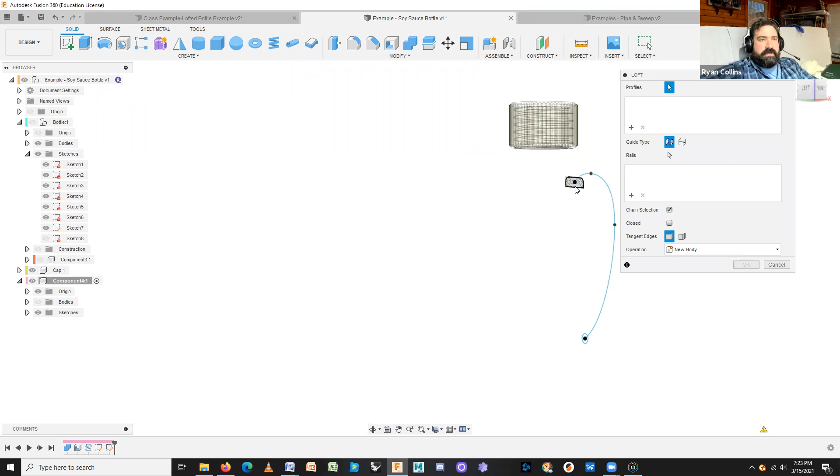Now I go back up, create a new loft. Select my profiles, that one, and that one. Yes, yes, yes, warning, warning, warning. Center line, select that profile, and it generates profile. What happened? Why did it create that on a...

Okay, that is problematic. All right, for some reason it generated it. I must not have actually selected the plane correctly. So I'll cancel this. All right, always a good thing to figure out is how to fix something. So I need to select. I want to move. Use my move tool. Sketch objects. I need that one.

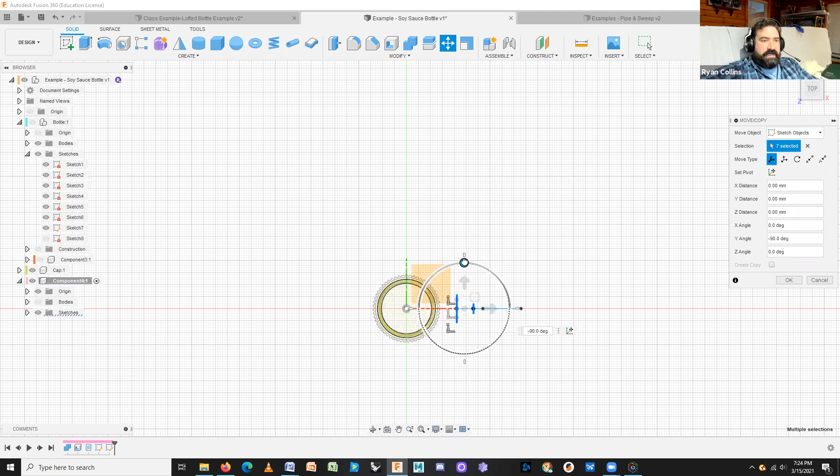Feels like I accidentally selected more than I want on that. Double click on that profile, and we'll do the same for that one. All right. Now, rotate up, looking straight up, and I just need to rotate that 90 degrees. Doesn't matter which direction. Okay. Great. Those rotated as I need. That was weird.

Go back, loft. Now select my profiles. Why isn't it letting me? Nope, not what I want. Did I, as I moved those sketch objects, what happened here? That's very strange. Try it again. That one? And why isn't it letting me select that one now? Ugh. All right.

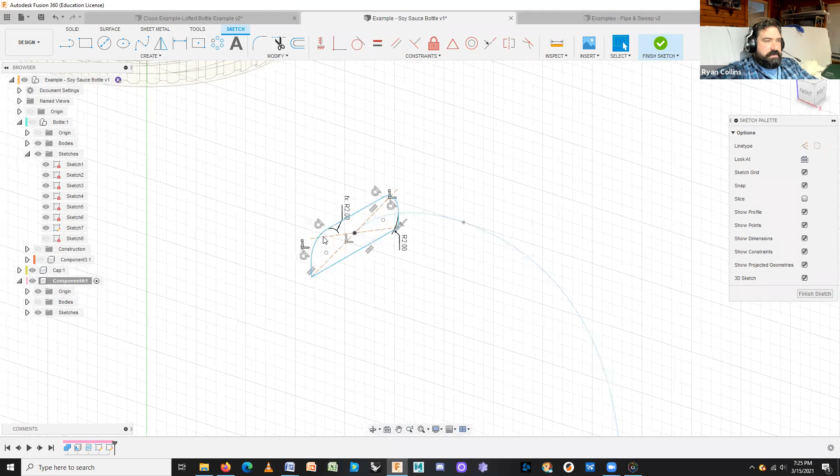Looks like I got a constraint error. Edit sketch. It should have been just fine and dandy. What's going on here? All right. Well, one of the issues I can see, it looks like it's not a closed profile, whereas here, highlighted blue. Go back up to the top one, not highlighted blue. So there's something very wrong with it. I must have done something that broke its edge.

Not entirely sure what. So just for example's sake, I'll go ahead and, that might be it. I think the radius of my fillet is too large. Yep. So what's going on here? Let's drop that down to 1. Oh, well, that's very not what I wanted.

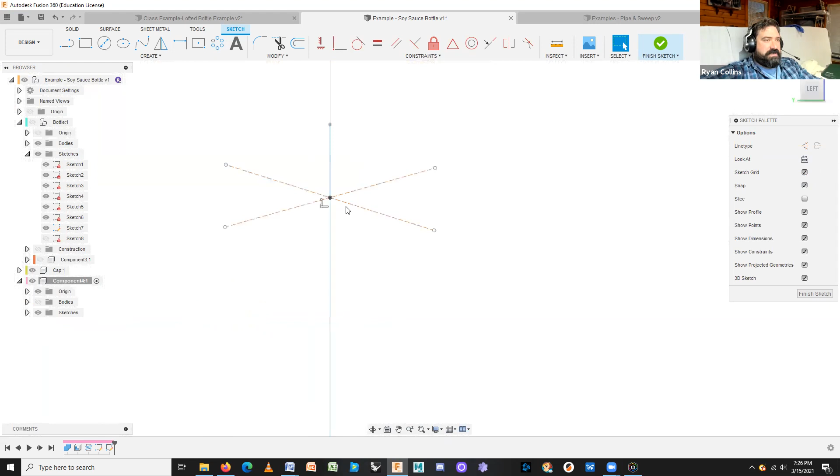All right, so this profile is apparently just full of problems. I don't know what's going on, so we'll just fix that real easy. Delete it, and I'll start another one. All right, fine. Another center line. There we are. Yes, on that plane. And what was it, like 12 by 24 or something like that? Or 8, 12. Sure, great.

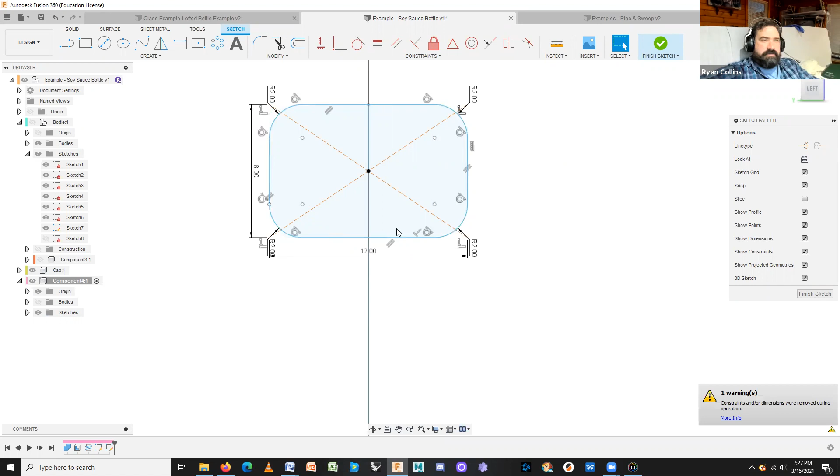And again, we'll just fillet those. Sure, 2, why not? Sometimes it's faster just to, come on. 2. 2. Yeah, I think that fillet was for some reason too large, and at some point it altered and definitely mixed up. So, all right, cool. Now I have 2 proper fillets, or sorry, 2 profiles.

Now we go back to the loft. Select my end profiles. Select my center line. What's the problem? Not visible. Oh, because I had bodies hidden. There we are. All righty. Now we got it going. Okay. New body, super good. It's floating off in space. That's mildly problematic, but that's okay. We can fix that.

Okay. All right, now handle-tastic. So what I can do now from here, because it is in fact floating off the surface, I did that intentionally, just because sometimes it is difficult to snap directly to the profile of the actual vessel that you're creating. So now what I can do, use the move tool, not sketch objects. I want the body. But that one. All right.

So this is one of the problems sometimes, that it will automatically generate local coordinates for whatever vertex or whatever you just selected. So instead, what I'm going to do, make sure that sketches are hidden, all that fun. And I'm just going to select with a selection box, and it still did it. No, that's going to do the whole thing.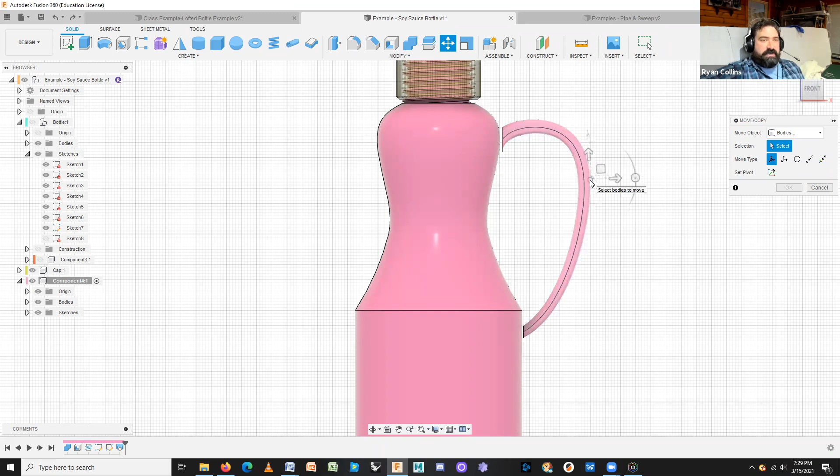All right. Well, if it's forcing you to do something like that, because it's an object generated from a loft, especially curved ones like this, sometimes it does stuff like this. So an easier way to get around that, because what I want is it to actually just move left and right. So what I'll do is I'll hide that first body. Now, when I go to select, I can select from just an endpoint. Now I have a reasonable set of coordinates to work from.

Now I'll move this over so that it intersects the bottle. Cool. Okay. That was less painful than it should have been, or at least more awkward. All right. Now I can join these 2 together. So you can make all this stuff separately, glue it all together after the fact.

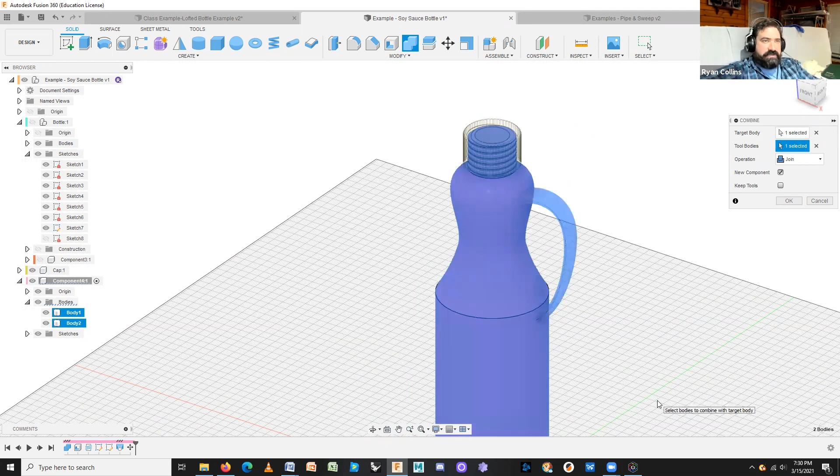So use my combine. Target body is the first body, the actual bottle. Tool body is the handle, because that's what I'm joining to. And we'll select join. Great. Now what happened? Why is that ghosted?

Oh, I must have accidentally had the create new component active. Yep, my mistake. I kept making more and more and more components. So that just makes things awkward. Really, it just makes it hard to see what I'm doing. But there we go. Great. You didn't need to do it that way. I just forgot what I was doing.

Now, in this case, it worked well because you can see inside that, or rather, let me change the visibilities with hidden edges, and you can see through the bottle. Because I made that shell operation, the walls thick enough, it did not leave like a weird little floating tail inside. If that happens, you can go back and change the profile line to better match what you need.

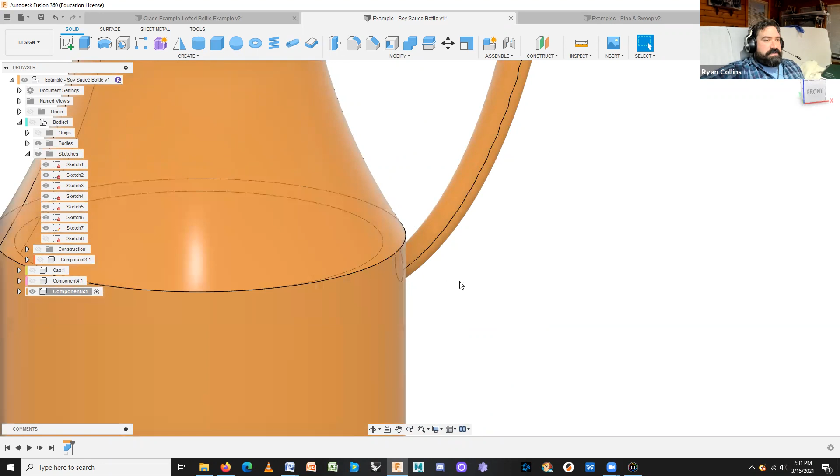All right, so those are joined. If you want, you can go in and add like merging fillets and things like a fillet right there at that edge. And we'll say like 1, see what that does. See if that goes completely nanners. Nope, it just blends the edges together. It's a nice way of doing it. I'll add another one right there. And 1 again, that's fine. Yeah, sure.

So that's just a corner fillet, surface to surface, and it just kind of blends the parts together, rather than it just being a really hard butt against one another. Great. So that's my bottle. Again, I'll need to tweak this top section anyway. Unhide the cap, and just so I'm not going cross-eyed trying to see what I'm doing, I will go back to shaded with visible edges only. I will activate all the things. There we are. Starting to make a bottle.

Next is the joint. So far, we've really just been making parts with the Loft Tool, but really basing it off of everything we've been doing so far. Sketches, merging sketches, extrusion, cuts, using circle patterns, things like that. This is a completely new aspect. Joints. So in the assembly toolbox, right where it has new components, this is where we have different joints.

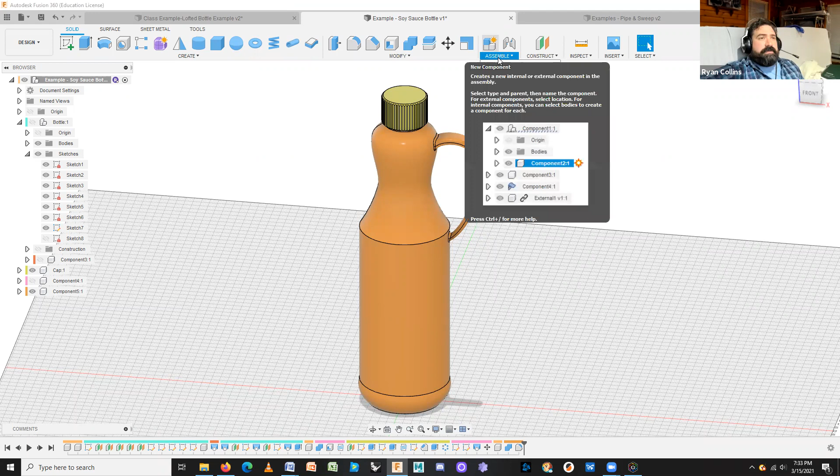Now, for the most part, you're just going to be using the default joint. And what this does is it allows you to actually animate components as a mechanical item in Fusion. Really great thing. It takes a little bit of getting used to, depending on what you're doing, but it's a pretty cool tool and they've made it pretty streamlined. So as it says here, you can add this to your toolbar. If it's not already there, you mouse over joint, 3 dots, add that to toolbar, and I'm going to add mine by shortcuts also. Or you can press J, and that will create joints.

All right. So in a similar fashion to some other things like the combine tool, you have your main body, your main target, and then you have the thing that's going to move. So if it's going to stay put, that's your first component selection. If it's going to move, that's your second. Now, there's different modes. We're not going to mess with the between two faces and two edge intersections yet. We're just going to work with simple motion. And what you need to do is select in between the area you want it to work. Let me make that make a little more sense.

So first I'm going to hide the cap because I want the first part of my joint to be at the top of this cylinder. Now, this is actually one of the updates, they've updated the little icon for joints, so it's a little bit easier to see what you're doing and your references. So I mouse over the top, and sometimes it won't let me select exactly that. You can see that as I move my mouse around, it's actually dropping down inside that cylinder to some other vertices and such. Now, if I get to that center point, yeah, it actually was letting me snap to it.

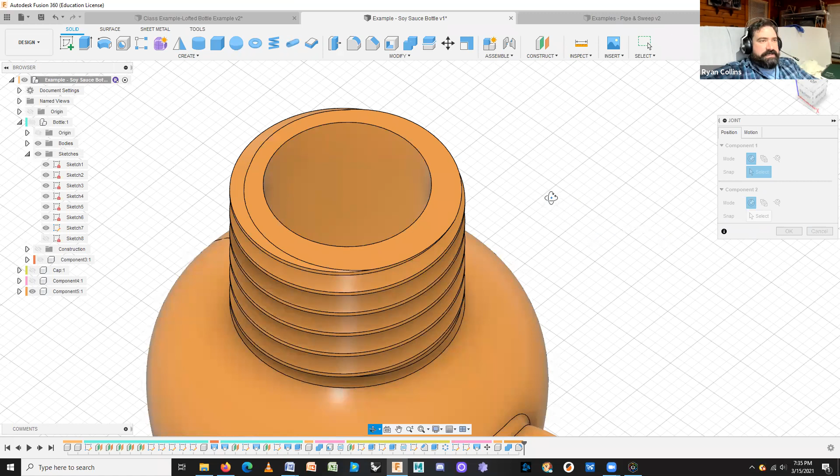Great. But if you're having trouble selecting stuff, what you can do is find something that shares that same plane, like the top of this lip here. I mouse over that, and you see that it highlights in kind of a dull color. It kind of glosses over. And now you can see in the center of the cylinder, as I mouse over this plane, it creates a little reference icon. It's a little plus sign. It's hard to see, I know. If I mouse over here, hold down Control, that locks your selection to that plane. So now if I mouse over here, oops, what's going on here?

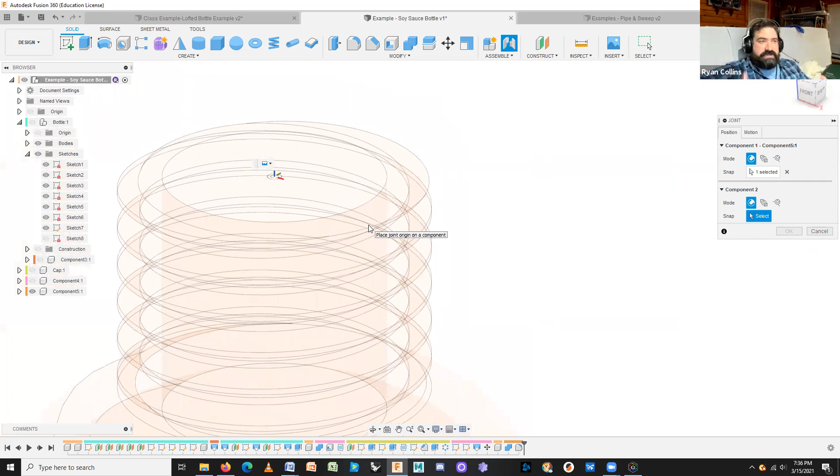Now it ghosts the object because you're done selecting that part. So now I want to unhide my cap, and if it helps, hide the first component, because I want the other side of my selection, the inside of the cap, because that cap's going to snap to the top of the bottle. Same thing, now I'm selecting the bottom surface of this cap. You can see it highlights under there—tumble around if you need a little easier access to see what you're doing.

Select there. Now when I unhide that component, now I have—oops. Now it's asking me to align the joint. First we need to select what kind of joint it actually is. Right now the joint alignment is perfectly fine, that's where it is, because we were able to snap it all in place. It was built in place. So there's two tabs: position, which is what we're doing, selecting the position, and motion.

Right now it's a rigid joint. Basically you'd use this if you just had two parts that were going to be assembled, glued together basically, but you still wanted to show them as a joint because you can actually do an exploded view of stuff—it's pretty cool. But you have a bunch of different options.

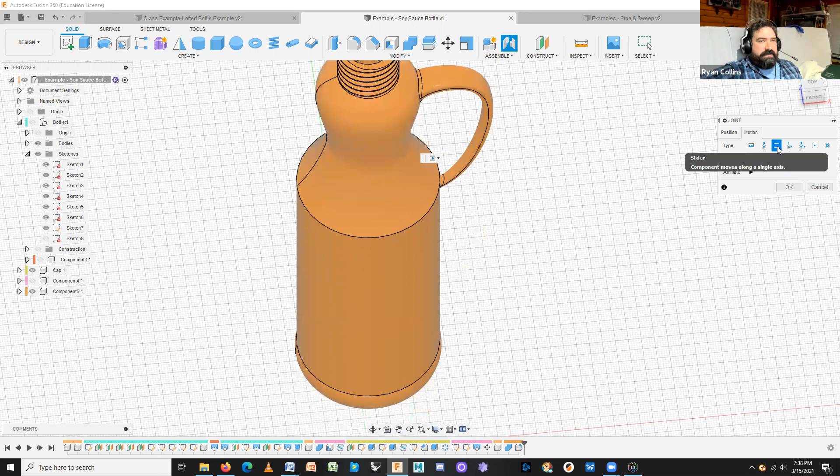If you select revolute, it's revolving, and that's problematic because it's spinning the bottom. And slider, sliding up and down. Cylindrical—yeah, that's not supposed to be doing it that way. We actually want cylindrical. And when you click animate...

All right, well, I'll fix that in a minute. Okay. All right, I think what may have happened is I got confused on what I was doing there. The joints—I think I actually got that backwards. Anyway, in the hierarchy tree, you have a new drop-down, joint.

You can control different elements here, but if you go just to the first part, the main level, this little point here, edit joint limits. Click that, a new toolbox comes out. I really don't know why these aren't one and the same. But this is where you can work with your different parts. All right, yeah, this is just going to confuse the hell out of everything. I got that backwards.

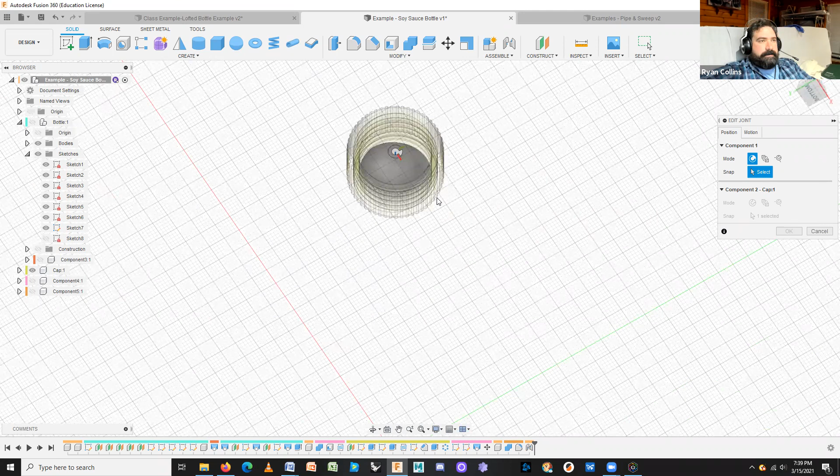So let's go back, edit joint. I need to clear out my selections because I got it backwards. I want to select the cap. Why is it doing that? Great, I'll just delete it entirely. I don't know why it's doing it that way. All right, so...

Inside of the cap, do the same thing—I'm doing it exactly backwards. Mouse over that plane, hold control, lets me snap over there. Super duper. Unhide the cap. There we are. My mistake.

Motion, still cylindrical—super duper, that's what I want. Okay, same deal, go back up to the cylinder joint. Edit it. All right, so this is where you can set limits. Right now you have two options because the cylindrical joint goes up and down and rotates. So rotate—yeah, we can let it go 360. Hit animate, and it rotates.

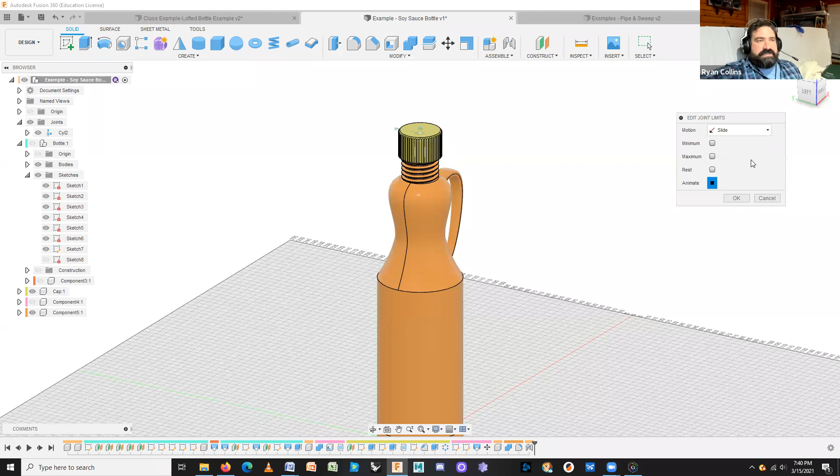However, I want to adjust the slide. So first I'm going to select minimum, and we'll leave that at 0. Maximum, you can do it numerically, or you can use a slider—if you zoom in you can see these little flags, that's what you can slide. As I drag that, I've got a numeric input pop up. I can continue to drag if I want. We'll just make it an even 30. Cool.

Now when I animate... no, I don't want that to be 0. I want minimum to be 0 and maximum to be 30. Thank you very much—now it'll go from 0 up to 30. So that's how you can set limits. You can click rest and it'll just pause between.

But I'm just going to leave that off. Click OK. Cool. So now when I click and drag this, I can actually click and drag the cap.

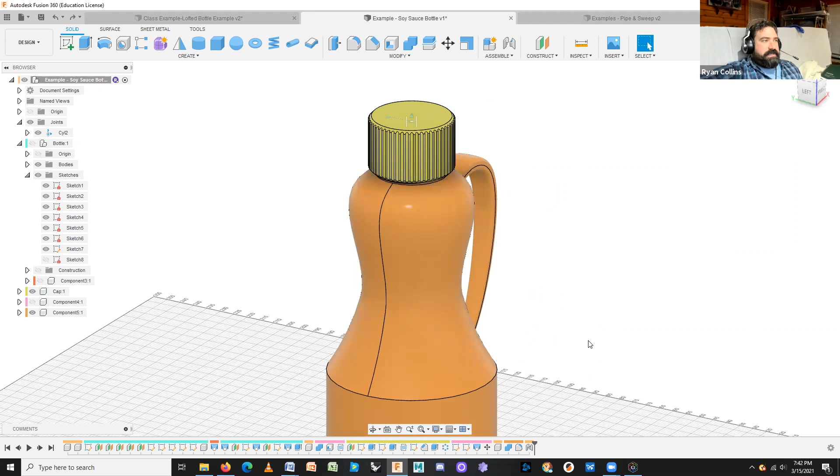Oops, skipped a step. Before you do that, you can animate it with the actual icon there, but that's a very foolish way to have to go all the way around. Cancel that. What you could do, or what you need to do, is you see when I clicked and tried to drag the cap, it drug everything. And I don't want that. And of course, the revert icon comes up. Revert, I don't want that.

What you can do is you can ground one of the objects. And the one you don't want to move is what you want to ground. Basically what it does is it tells Fusion, all right, this is the thing I want to have locked in place. It doesn't move anywhere.

So what you do is you go to your item, in this case go to body. There we are. Right click on the hierarchy tree part. What the hell? Ah, there we are. Looks like you can't just ground it to a single body anymore. Awesome. Love when they make these little changes.

All right, so selecting the entire component, right click on the component. That is the second option on your right click button. I click ground. A new icon pops up in my time slider, little pin. Now it changes the icon of the component, putting a little pin next to the cube. Now this object, this body, this component cannot move.

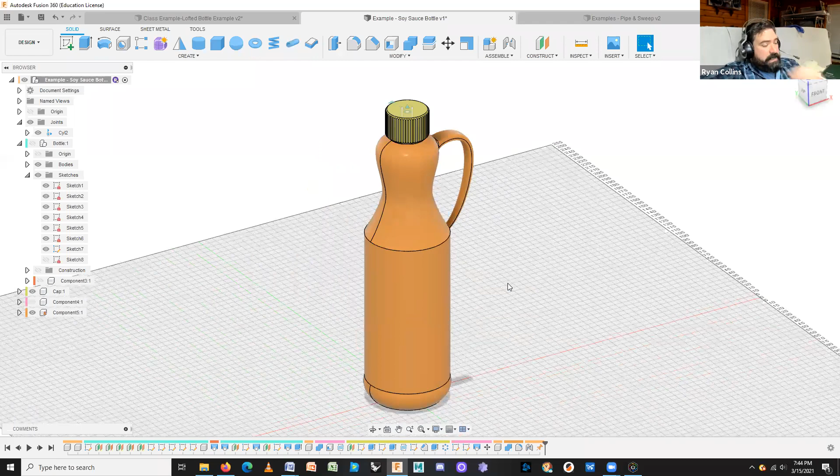I don't want it to be in the new position, so revert. There we go. Like I said, I have a few things I want to go back and fix on this. But I made a handle that goes from more of a rounded rectangle to a circle. That's the same way you could go about creating a loft body. Create different examples as you prefer.

I created, and I'll hide the cap. I put threads on the top. It is a hollow bottle. Unhide the cap, hide the body. I made a cap with features. I added threads into that, and the two of them are joined together with a joint.

So I know I just threw a whole lot of stuff at everybody, but this is the main part of the project, and I would like you to make 2 different ones. That will allow you to play around and experiment. You want one with 1 handle? Great. You want one with 2 handles? You could have gone back, or I could have gone back, and I'll just activate that final component there. I could have made 2 handles and made 1 on either side, something like that. Just different ways you're going to go about this.

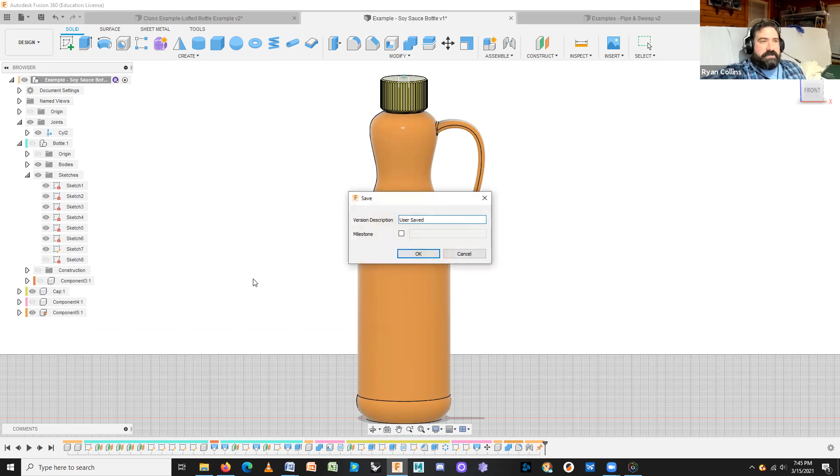So experiment and play. You're referencing off of an actual bottle. If you don't have something, try to take some rough measurements off of some photos or something like that. That's perfectly fine. I'll go ahead and save this. You're welcome to go through this project as you like. But that is the assignment for what we're doing.

Now, like I said, we're going to see about it. I would like to be able to kind of move through this because we've got still a lot to try to cover for the semester, but this is a lot to work on. So let's see where everybody gets. Pardon me. Let's see where everybody gets, but realistically, I'd like to try to move forward, but we'll see if that works. If we can have it due next week, that'd be great. But let me know what kind of issues everybody is having and such, if you're having problems, if you have a lot of questions, because we just covered a lot.